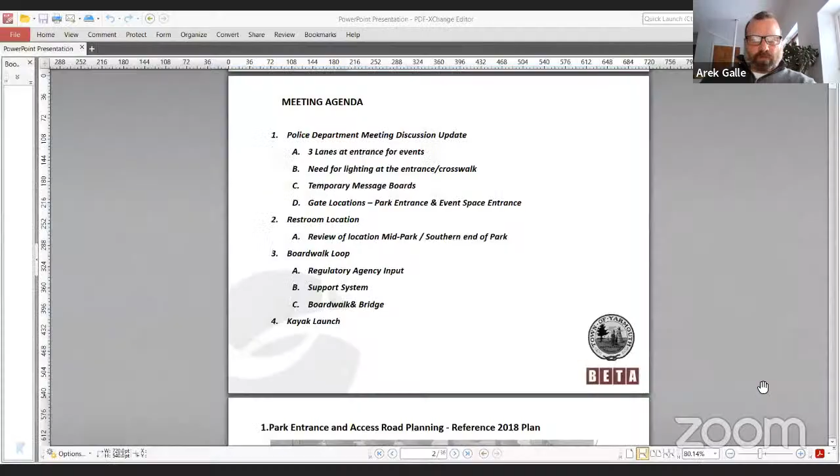Great, so you should be able to see this. Yep. So we had a couple of good meetings in January, and thought we'd recap, talk a little bit about our conversations with the police department. We also had a meeting with DMF and DEP just last week, and that was also a good discussion. So I wanted to talk a little bit about that, touch on some of the thinking about the restroom location, and then maybe close out with some thoughts on the boardwalk and the kayak launch itself.

So, this package really is substantially the same as what we sent out last week. We just added a couple slides today about some of the galvanizing treatments, which we can talk about a little bit later. So just to kind of refresh, this is where we started with the police, and early concepts had sort of this curving loop road coming out, the idea about a turning lane, as you approached route 28, and that's kind of where we're picking up going forward.

We talked with them a little bit about what's worked for them in the past as far as the events. And we said, this is kind of where we're headed right now: a through lane in that's maybe 11 feet wide, a lane out, and then providing some space at the end for that left turn movement. We'll be bringing bicycles and pedestrians in on the left-hand side, the west side, with the goal of having greater walkability for the site than there is today.

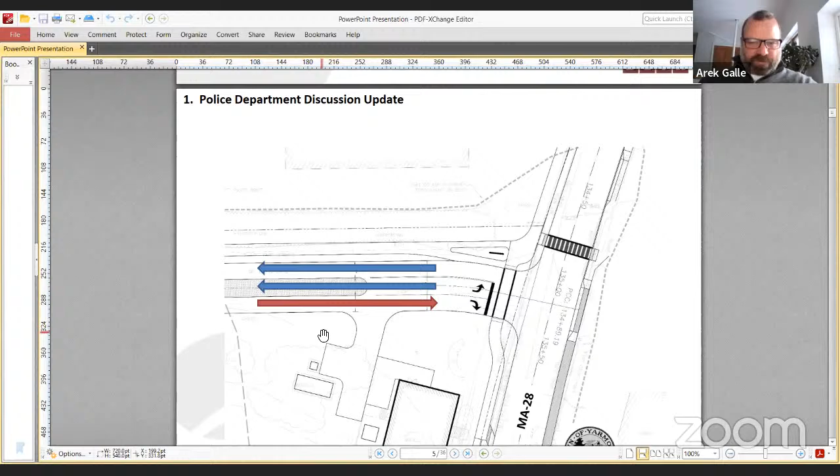They expressed a real interest in wanting to have maybe that center lane go all the way down into the park. They thought the value of that was, in an event, they can run 2 lanes in - you've probably all experienced this - and then run essentially 2 lanes out when the event is over, and still have this ability to get people in if they need to. So that concept kind of led us to a discussion of more than just a couple of spaces to allow for a left turn. We should probably look at making that lane go kind of all the way in.

It's cool, so we can have our own version of the Southeast Expressway right here in Yarmouth. Well, I think that's one of the things Kathy really was pointing out and expressing concern about was not wanting to carry 36 feet of pavement all the way across the entrance. And if there's a way to do it, there's either a textured pavement or a grass pave island that could be driven on when vehicles are coming in or leaving. But under normal conditions, it would look a little greener than it would if it was all asphalt. So that would be - this is pervious, I'm sorry, Arek - that would be pervious material in the middle?

We could do it as a grass pave, which is a synthetic geotextile product like reinforced plastic cups. The loam would be put level and seeded with native seed, so it's got some durability there. Another option would be a modular concrete unit that has space for grass to grow inside the units. A third option would be a textured pavement through the center.

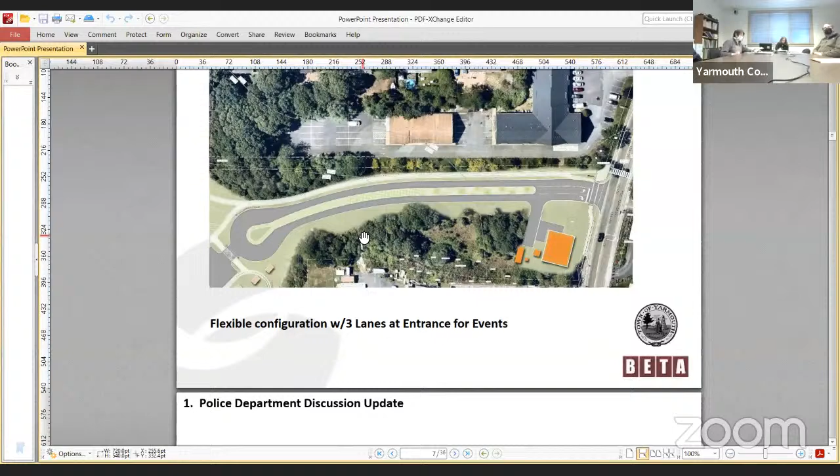It probably wouldn't be curbed just because the police said their ideal would be to have that lane as far back as possible. No, I mean a median between the in and out lanes. So if you ran that all the way through and then narrowed it, maybe it's only 6 feet wide — what you're showing is probably 12 feet wide.

So cut down its width by half, so it's 6 feet with plantings, and push the left and right out lanes slightly further to the east. But you understand the purpose of the center lane is to serve as a lane going in or out during events, so it needs to be the width of being able to be traveled. Are you talking about the width of mountable curbing? No, what I'm saying is right now you're proposing a median strip through there with a left turn pocket.

What would happen if the median strip was reduced so it's only 6 feet wide instead of 12, narrower, and then you pushed the two out lanes to the east? What's the benefit of that? Well, then you get 2 lanes for stacking during events, which is what the police are looking for.

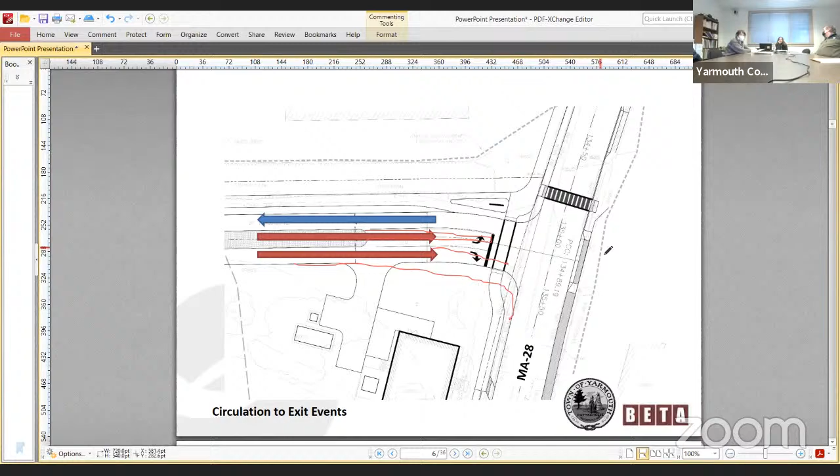For events they're just looking for ways to get people out quickly. Looking at how events were run in the past, when you're leaving you want to get as many people going out as possible. But it looked much more attractive if you had a curved median with plantings and bushes.

Anything we end up doing that is traversable is going to be a weed patch. It's going to be very unattractive over time, won't be maintained well, it's just going to be mowed. In essence, it's going to look like the parking area is pervious. I'm trying to think of an example around here — you know where Bed Bath & Beyond used to be, next to Christmas Tree Shop. It's basically pervious, but it's not the most attractive thing in the world.

Well, I think there are aesthetic considerations. You don't exactly know how that's going to look or be maintained over time, and it is the entryway to the facility, so I think it should have a lot of pop to it and look attractive.

One of the ways to do this too, which we talked about with the police, would be that if the lane shifted to the west and this treatment became the eastern shoulder, it would just be sort of part of the grassed landscape to the east of the drive. Then the median could have more planting. In an event, you'd be having people driving on the grass, but it would be reinforced, with maybe cones along this edge to define it.

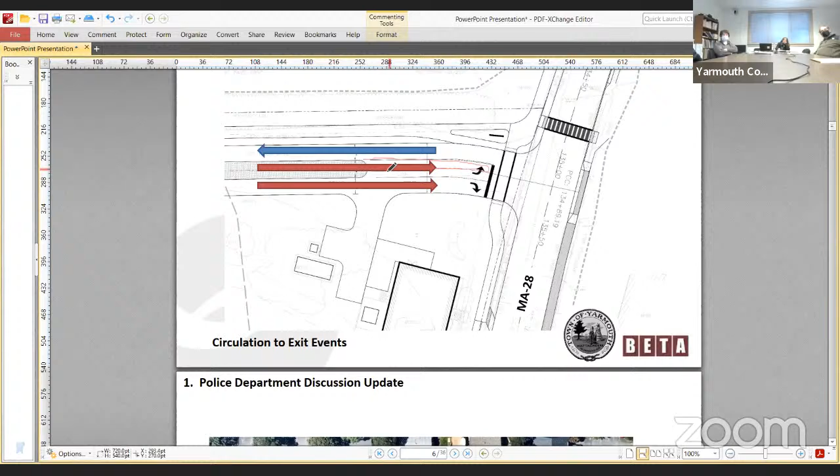You could use turf blocks — what you could do is a permanent pavement to the right of the lift station, and to the left of the lift station use your turf blocks on the east side. So then you'd have the grass texture we're looking for, and the police could utilize it, but you don't have that formalized pavement.

Right, so it'd be paved from 28 to where the lift station is, with some kind of transition. From the left of the lift station, you could have the turf blocks, but the center median would extend all the way to 28 with plantings, signage, or whatever you wanted. It would look more inviting than having 3 lanes right across at the entrance.

It could be something, it's a little skinny, sorry for the drawing, I'm drawing with my mouse tonight, not a pencil, but anyway, you can see it could be a small median there maybe to just do something with the gateway. Oh no, I'm saying extend the full median all the way to 28, to the north.

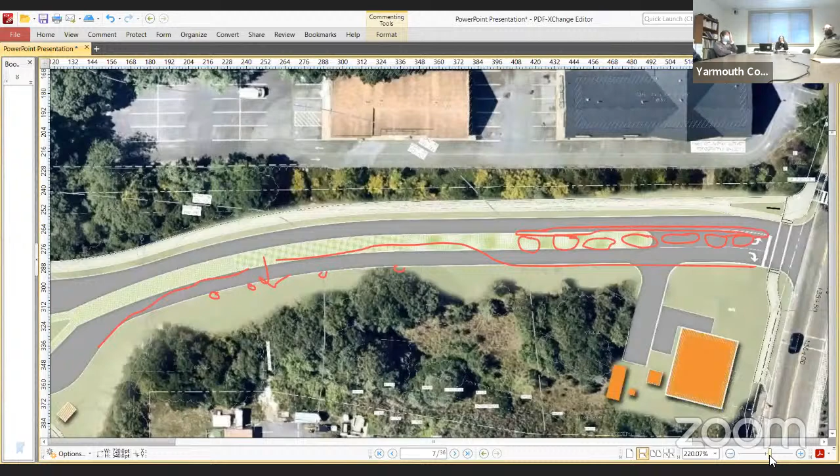That's the median - no, there, he's showing a partial one. It looks like it's lined up with the entrance to the water station. He wants it pulled out all the way to 28.

So Arek, get rid of the left turn pocket, extend the median all the way through to the stop bar. So take the green and move it all the way to the right. But these are cars that are stacked up in a line to turn left. He's suggesting bring that green barrier in the middle all the way out to 28.

Yeah, right to the stop line, the full width, Arek. How wide would you - whatever the width he's proposing is, that would continue 11-foot wide so that people could drive their car on it. Well, no, correct, this is an 11 and this is an 11.

So then what you would do, Arek, is the existing 11-foot lane you're proposing on the east side will go all the way through. Instead of it being a right turn arrow, that becomes a left turn arrow. You'll see in a minute.

And then to the right of that, or east of that, where you currently have the left turn pocket - take the left turn pocket and pull it to the east. And that would be your right turn lane.

Now you would have pavement from 28 to the lift station, and you would transition. Everything to the left of the lift station would be the turf block along the east side, because we're proposing a grass shoulder - it would be a usable grass shoulder though for events.

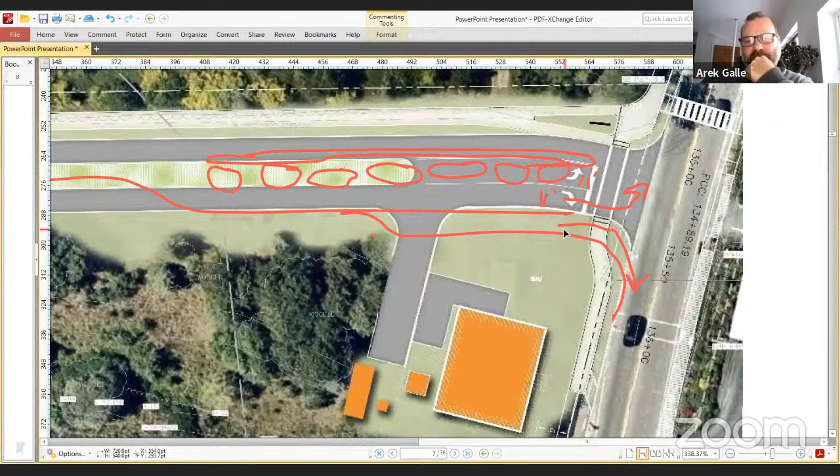So people will be less inclined under normal circumstances to drive on the grass to make that right. Well, that's gonna be paved there - he's saying the right turn lane paved, that would be paved all the way to the lift station or beyond. In other words, Arek, you have to figure out your queue lengths under normal conditions, and that's how far the paving would extend back.

Beyond that point, where all the little dots are, that'd be your turf blocks, so only during high volume events when the police are there. So you have the benefit of having the grass along the shoulders, but we have a really nice decorative median with shrubs and plantings or flowers, which we would not be able to have if we had turf blocks running down the center. So it makes it more inviting.

It's aesthetically much nicer. The only concern is we're already squishing the space that's available for the pump station, and now we're going to be squishing it more by the width of the median. It's only 11 feet - how much space do they need? They don't need that much.

It basically - it's depth, it's a massive vertical pit, so they need to get horizontal, up to a certain height, and critical facilities want to be 3 feet above the base flood elevation. So they need a first floor elevation of like 14.

What'll happen is usually it's on a concrete vertical stem, and then you build the structure horizontal on top of it. It doesn't bleed out horizontally, there's no handicap accessibility to it, so you need to now build the lift station - that's what they had before, was handicap accessibility.

No, for a lift station? A pump station, yes, that's what they had before. I'm surprised because most of the stuff is non-accessible.

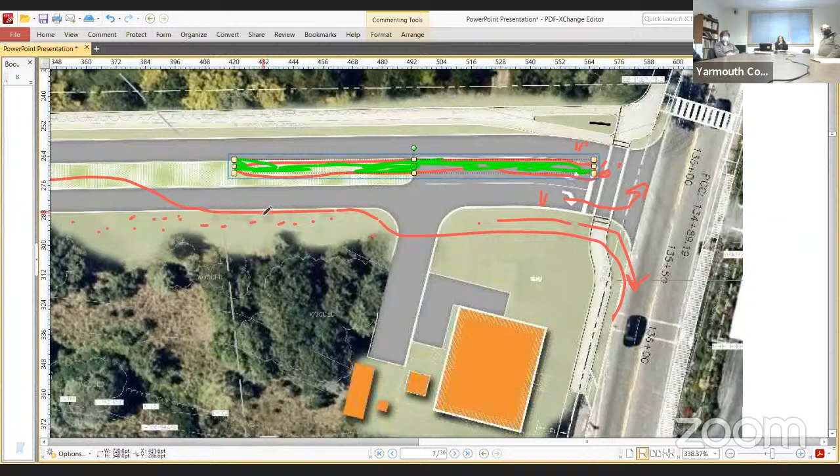Let's double check that. The way we left it is because we are encroaching more and more on the space that was left for the pump station, in addition to the fact that there is a jurisdictional isolated wetland that has a 35-foot offset of no disturbance and a 50-foot no build area. So what we were planning on doing was proposing what we wanted to do and then provide that information to the pump station consultant, CDM, to see if they can fit it in.

So we could try it this way and see whether that would provide them with adequate space, understanding that we may have a problem later down the line with them having enough space and what elevations they need to get up to. So we're looking at 11 feet? Is that what you're thinking? Yeah, that's what we're looking at. We'd be doing a 6-foot median, curbed, planted, which I agree would look nice. And then everything would bump over, so we'd have 22 feet. It's an additional 6 feet more or less that we'd be pushing this way.

Would you move it down? I'm sorry, Jim. Okay, thank you, you are the chair. We gotta figure out a way to get my attention here, so that I can, and same with others, participate.

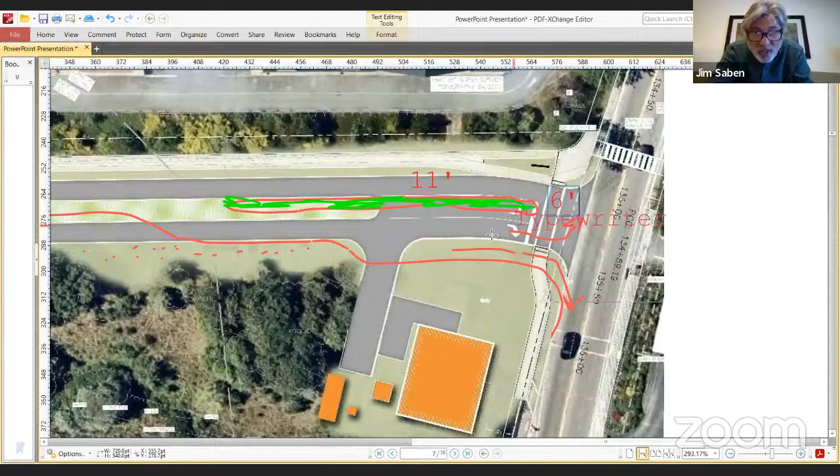I would suggest that we go back to whoever is designing this pump station and say to them that we need to know now what your space requirements are. Because if we design this thing and then they come back and say, oh by the way, we need more space, then we got to go back to the drawing board. So I think it's important that we get a commitment from them sooner rather than later as to what they need. Because my experience with these, Jim, typically you need a parking space for one vehicle for a maintenance technician, just to check things out, plus that longer drive for a boom truck with outriggers.

When you're doing maintenance work, when you're going to pull pumps, there'll be a pad-mounted transformer, and you're going to have a generator too. The biggest thing with this is it's gonna be a big ugly facility. So the biggest thing is, how do you hide this thing? Camouflage it, yeah.

Part of it is great, but tell us what their requirements are for the site, how many, thousands of square feet or hundreds of square feet. We can at least then move forward with our design.

You need to look at the third dimension. I guess this is somewhat of a problem because they need to get up to a certain elevation, they're not going to come off at that location. There's no way, the grades are going to be coming off much further south of our driveway in order to get the grades back up, because they are going to try to elevate it as much as possible. They're not, it's too close to 28, they're not going to be able to mound that enough, from my experience.

What they'll end up doing is a pedestal stem that'll stick out of the ground. The nicest thing to do, I've seen some nice ones, is use brick and other materials so you can make it look colonial.

You make it look like a fake building, with most of the building below having fake windows. It's going to be this vertical stem that comes up above the floodplain. You can do Cape Cod shingles with white trim.

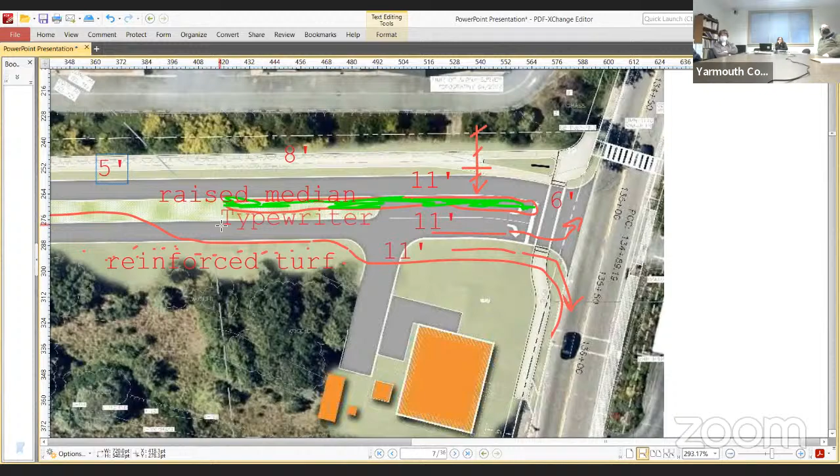I think at some point the police will have to drop the median, and that could be okay, but in this scenario you're going to want to be able to get 2 lanes of traffic able to get into this site.

So there needs to be a gap between the cul-de-sac area and the median, which could be fine, because if you had people coming in, they would essentially need to cross over.

You want 2 lanes coming in? Yeah, they do. They want the ability to have 2 lanes in for the most efficient flow, and ideally the ability to do a U-turn around this island and continue out, assuming this might be closed off for the event.

Jim? Go ahead, David. Arek, can you go back to your first graphics where you had the blue and red arrows coming in and going out? Sure, yeah, this is where we started.

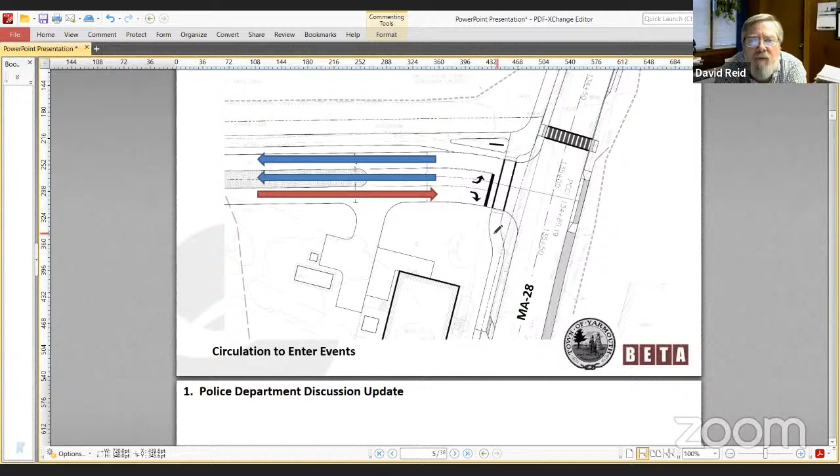Isn't there an advantage to the flexibility of that, to allow us to have 2 lanes coming in as well as 2 lanes going out when we need them? Because I would think when you've got people arriving for an event, it's not quite the floodgate it is when they're leaving, but wouldn't it be advantageous to be able to have 2 lanes coming off 28 queuing up to the entrance to the plaza there?

Rather than just a single one, because you might also have people coming in and going out of the kayaks at the same time, and the boardwalk. Doesn't keeping it kind of open with 3 lanes, with a zipper lane in the middle, give a lot more flexibility than narrowing us down to just 2 lanes exiting and only 1 coming in?

Well, it could be run either way, but I think they need the most flexibility, as you point out, on the exit movement, because- well, that's certainly the way it was when the drive-in was there, at the same time, right. There was only one thing going on when the drive-in was there.

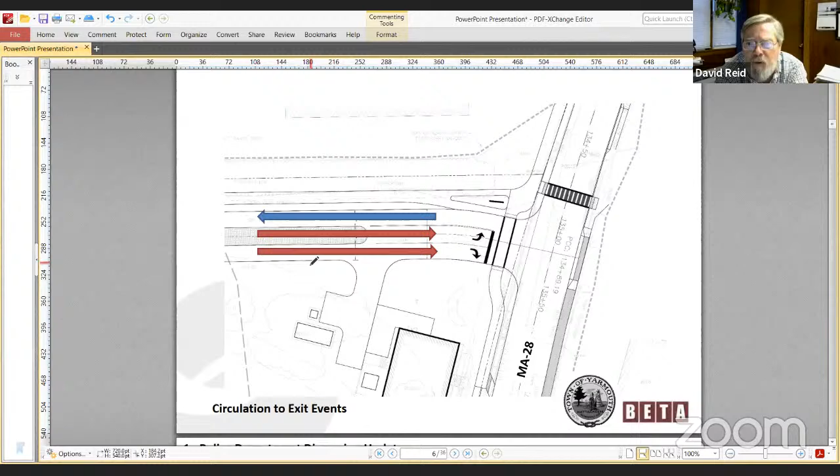When we've got also kayaks and boardwalks and artist shanties and other things, might we want to keep it simple so that we have the flexibility to have 2 lanes coming in if we need them?

Well, you could with Rich's idea. I think it ends up being a little bit of an odd initial movement, because you do want those 2 lanes in. I think it could be managed with the police detail, but you would basically be having...

people coming in this way, and then on that event you'd also be sending people in the second, or they may be coming from this part of the Cape. So the island would be splitting 2-way in, and then they have to reconvene at some point to get into the event parking.

This works fine on an exit, where you'd have folks here, maybe driving on the turf, and folks driving here to turn left. It sort of favors a more intuitive layout for exiting. On the entrance, it's a little atypical, but I think you could do it with a detail.

I don't disagree that an island would be nice, but I think it would really, from a functionality standpoint for an event, be really difficult going in. People would intuitively not want to go on the wrong side of that island. Even if you have people waving you on, intuitively they're going to feel like it's the wrong movement.

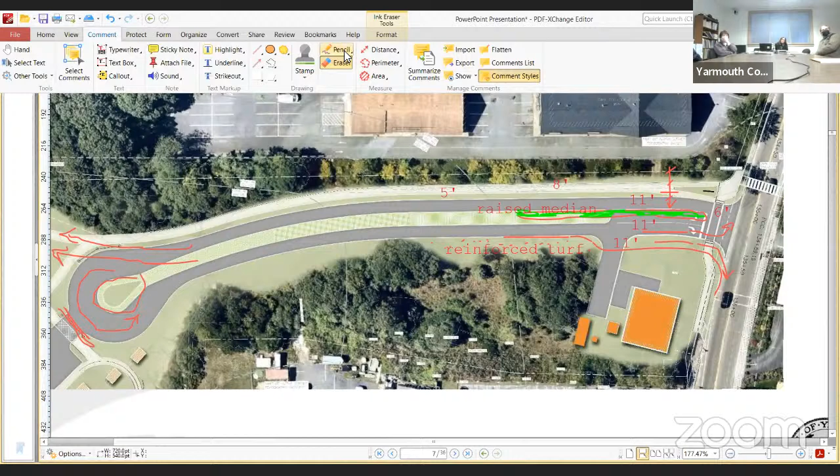Yeah, that's the tricky thing, you'd have to catch them. Let's just say people from the east are going to be sent in this way, with the island splitting them, and people from the west would be coming in on this side.

And here's the question too, Eric, are we gonna need a left turn pocket off 28? No.

What do you think about a regular use? Well, before you say no, remember it has to come into us for a permit. Our traffic engineers have been looking at it, and some of the guys in the transportation group were on the call with the police. Again, the feeling was that with the entering movement happening over a longer period of time, it was a little self-managed, staggered.

The presence of the crosswalks, and sort of courtesy gaps, you know, people acknowledge that folks are trying to turn left. There'd be message boards out here, there'd be people crossing the crosswalks. The courtesy gap allows some ability for those lefts to turn and make that happen.

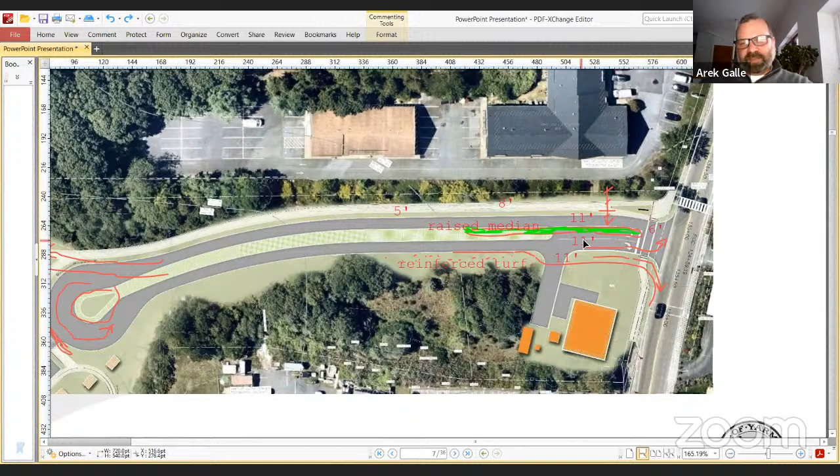On the exit is where they were a little more concerned with trying to be able to get everyone moving out.

So in order to move this along, I'm going to simply say something I say all the time: people are dumb. Keep it simple. If we get too complicated, we'll have somebody driving into the pump house station thinking that's 28. So however we design this, keep it simple, and I yield to the expertise of our traffic people.

One other thing, Eric, just noticing here, the 5-foot grass strip next to the SUP, you need to extend that all the way to Route 28. Yeah, the goal was to get a little island in here where we could put the sign, but you're right, that would have to continue right out there. You could shift it a little bit further to the west.

What I started to say is we're kind of up against a minimum vegetated buffer requirement here of 10 feet, and then the shared use path, and then the 5 feet. So there's some pretty linear math that we can relay to Jim's point, and relay that to the folks working on this station, that we are absolutely up against this edge.

Coupled with the grading and the barrier, this is an absolute minimum on the shared use path as well.

So, this is an interesting idea. I think it adds a lot to the aesthetic. I think it's just functionally, can you see it working on the in movement with folks coming in on this side of the island, and on the other side of the island as well.

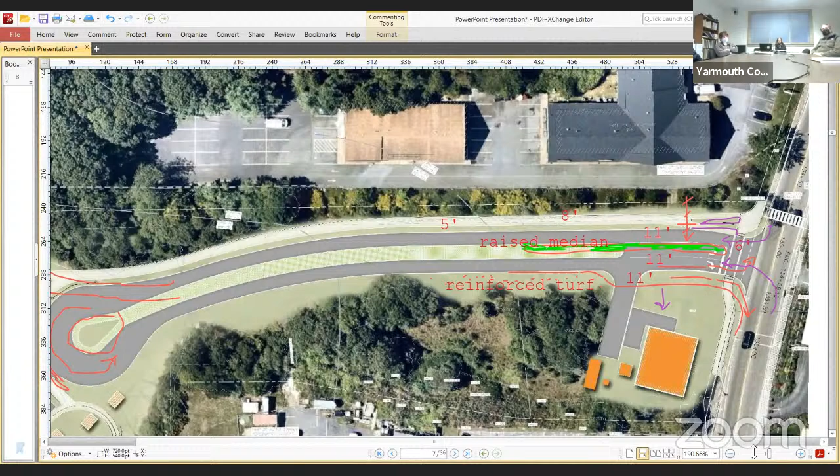I think no one wants to see a really wide throat of pavement at this site. I'd say 6 feet is like a minimum width you should consider, because it allows you to place signage so it won't get hit by vehicles and trucks. It's also big enough that you won't end up with a death strip that just dies out, wide enough that something will be able to grow in it. Obviously wider is better, but from our experience that'd be the minimum.

Okay, so as a group, where's our thinking on this? You want us to flesh out this raised median all the way through, run the math and see what this geometry looks like? Like I said, we'd have to end it. We'd have to have some kind of opening down at the southern end, where that median would stop to allow folks to cross over and enter the event.

Find out the requirements for the station. They're not far enough along, I think, in the design. I think it almost needs to go the other way, where we say, this is the space that we're taking—can you fit your station in there? Because we did try to do it the other way around, and Eric was going to take a quick look at it, but it just started getting so complicated. It's really not in his scope to be doing that.

Well, I'd say they haven't designed it yet. You need to fit your station here—this is what you have to use. But I think if we say we've done the bare minimum, versus, oh, now we've added another 6 or 7 feet, then they may find out that doesn't necessarily work for them. I honestly don't know, but we can certainly ask the ADA question, the handicap accessibility question.

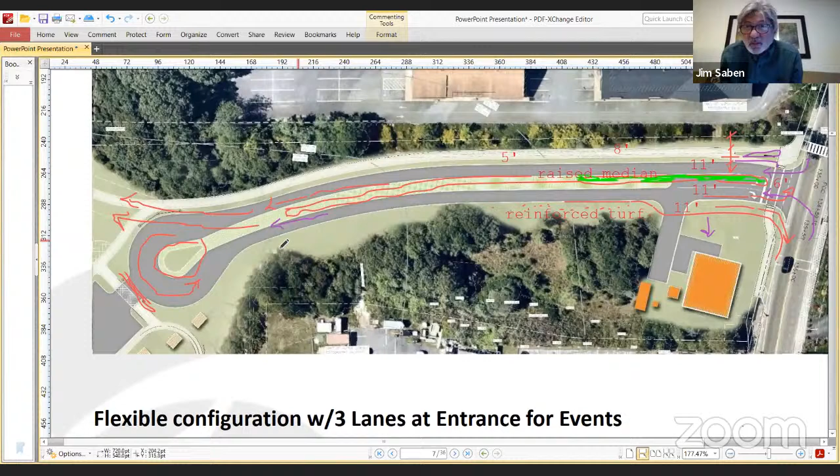I don't want to make it overly complicated—I agree with your idea. The only other thing that occurs to me, as you're sketching there, is at the far left end, instead of a sort of cul-de-sac, what if you made that more of like a rotary, so that you could shift the lanes back and forth?

Yeah, you're right, this would have to be open with this kind of concept. So then what you're saying is a lot like the entrance to Seagull Beach? Yeah, where you've got that rotary type thing, or a roundabout.

Whatever the engineers design along there looks good to me. I like the idea of having some vegetation there, but I see that it complicates the intersection to have too much vegetation in the middle. I kind of like to keep it simple, the KISS principle, right? But you guys are the engineers, so.

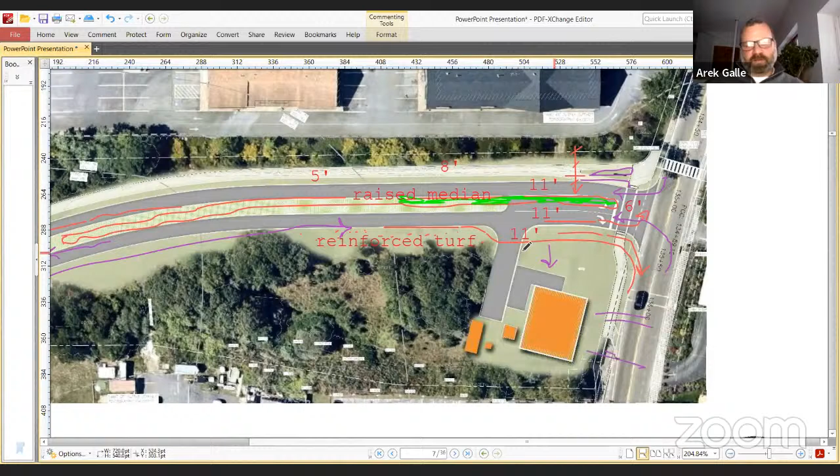Well, we are ahead of the pump station, and there may be some geometric requirements we don't know about, as far as where the pipes are that this is tying into—maybe it has to be in a certain spot. So we could show this as most desired, if the bifurcation of the in-lanes is okay with the planted median, and show that with that group. Kathy, I don't know whether it's a meeting or we just send it along and coordinate with them that way.

CDM? Yeah, and show them where we are. I mean, we know we need at least 33 feet right across there, and we'd like to see—I'm hearing a median is what folks are interested in. We can send it along and see if they want to have a meeting, but they're going to need to have all the background information with the isolated wetland and kind of like to what we're looking at.

I'm liking Kathy's idea of, let's just move forward and tell them this is what we're taking, you figure out what you've got to do. Just understand there might be some give and take, because we do need a pump station here. This is true, we do need a pump station.

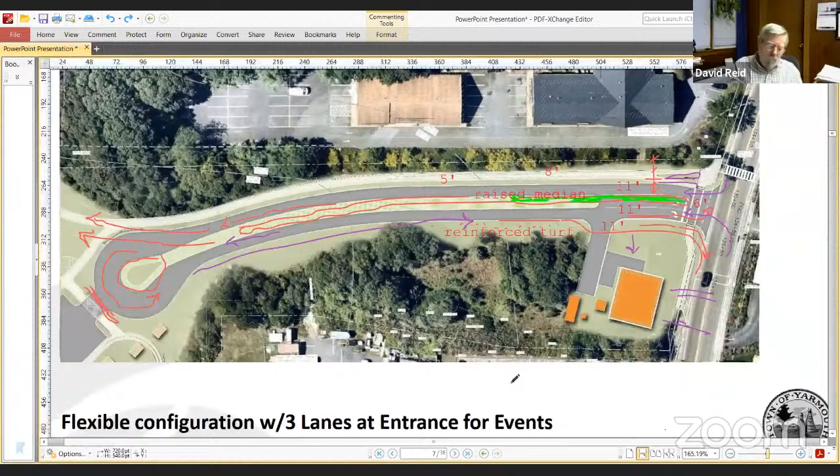Okay, Bud, do you have any questions or comments? No, I like the idea of a flexible lane, one in, one out, one that changes based on the event. So like that right there? Yep, like the expressway. Okay, Susan?

Susan, you have anything else to add? Actually, I'm in the Rich camp on this. I think we should pay a little more attention to the aesthetics. It's the gateway to what we're spending a lot of time on. If we can make it better looking and still retain some functionality, I think we ought to at least explore it. I think it's worth it.

Right now, it's relatively unattractive. It could be a lot more attractive and retain its functionality. So I think we ought to explore a redesign, a slight redesign.

So if you don't make the entrance inviting, we're gonna have a sewer lift station next to it, and then you got the plaza over there. What makes you want to go into it? I guess if we had to stick with the bare option, maybe you'd look at cobblestones or something for that center strip. But if we have an option to make it look better and retain the functionality, I think we should at least explore it, see how.

I don't know how cobblestones play out with regard to impervious surfaces, because I think all of this was going to be either pervious grass, or pavers. It was more going to look like grass because it's woven underneath the ground and you really don't see it, versus cobblestones. I don't know, Kelly, whether that would be considered—we'd have to do something with stormwater for that.

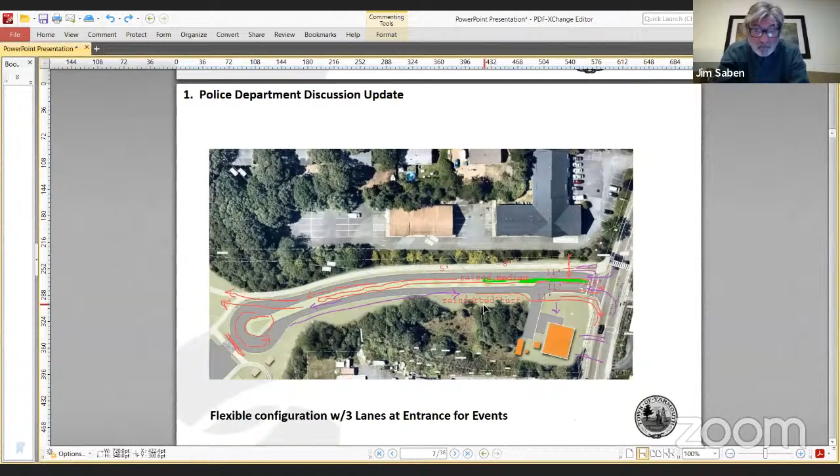Sure. So this was the conversation with the police and some of the other things they were saying, and we're already considering this, but this is related to the pump station. We said there's really not a lot of lighting there, it's quite dark at night. The existing lights are sort of utility lights on the poles. You can see on the south side of 28 there's no lighting there presently. So their feeling was they'd want lighting around the pump station and on the entrance drive as well coming in.

They also wanted the ability to put in a temporary message board, much like they'd done before. They wanted sort of a graded off area here. Again, to Kathy's point, these are the kind of things that impact a little bit the footprint of the pump station—having enough room to put in a message board that can be seen. I actually think it maybe would be up even a little further so it can be viewed in both directions. And all that suggested to us is that maybe the park entrance side needs to try to fit in here on the west side, in the form of some small island or something there in the shared use path.

Can I ask a question? The message board is temporary, correct, Arek? Correct. They'd bring it in for an event. This is just a typical one, though I think you have nicer ones. You don't have to worry about storing it since it's not ours. I believe it's the town's. I think what they really wanted is to know it wasn't sloped or tricky to get a truck up in there, and they wanted ease of deployment to get it in place quickly and then take it down and off site.

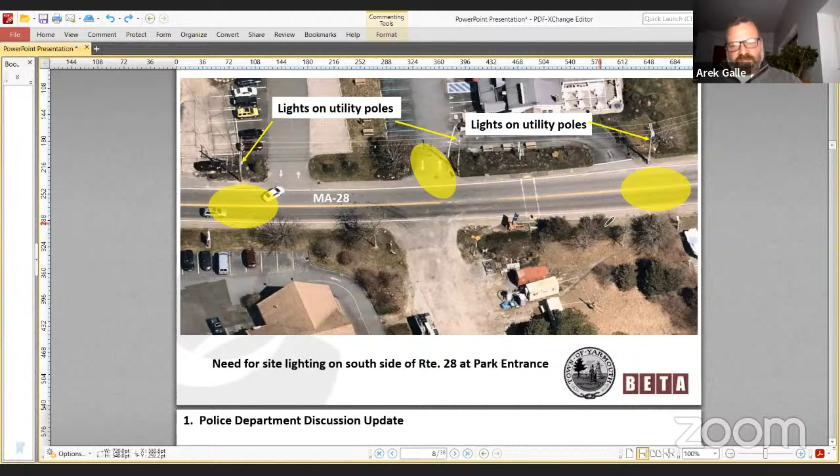Yeah, ideally it's all seamless and this whole thing has the same lighting and the same kind of landscape treatment to bring people in. I'd not celebrate this building as much as try to make it blend in with other large scale buildings and marine environments, and have the emphasis be from this edge in, with this as a backdrop to the lighting and the landscaping.

Okay, so we talked a little bit about the restroom location with the police as well. We're debating two locations - there are merits to this mid-park location and merit to the south. We asked them if they had a preference. They really felt that once it's off of 28, they have to drive in anyway to look at it, so they didn't have a strong view one way or another. They did say if it was in this position, they wanted to be able to fit 2 lanes of traffic in, so between the corner where the property bends and wherever this facility is, their ideal was 2 lanes into the parking and event space through there.

And you can see this, we put in the parking layout that's about 275 cars, I think, is what's showing there right now.

Here, how are you going to address this - the one thing I do see is conflicts between the bike and ped path and the parking facility, especially if you have people walking in.

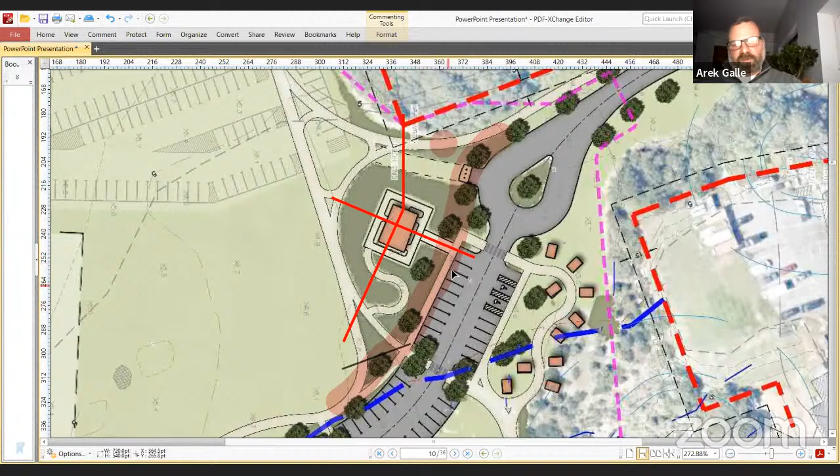Yeah, so one of the things we've been working on this week - I think I actually have a slide at the end I can show you - is trying to bring this through here and get the bikes to come in between the restroom and keep them closer to the road. In an event you would close off and not let bikes pass through there. So to your point, we're working on this, and the impact of that is it sort of pushes the restroom back a little bit in order to fit everything and get the bikes through here. But I think we have a scenario that works.

Yeah, it looks good, because that helps remove the conflict point, or reduce it, like in this one location.

Yeah, let me go a little bit out of sequence, but I believe we have this. You can see it here at the back. Yeah, no, I see what you're showing there. This is really in development, but I wanted to have it available today so you can see it coming out of the front here. So the impact is everything just kind of moves west, but we still get the 2 lanes - the ability to run two sets of vehicles into the site, keep the restroom here, line it up with the artist shanties, and still have the bikes come through across the front. Yeah, we think we can make that work well, actually.

So just jump you back to where we were. While we're here, if I can, have a discussion about the location.

One of the things I shared with Kathy is why I still think this is the preferred location: if we think of this beyond just a bathroom facility, but think about it as a bathroom and a spot for coordination of the space, be it for storage of tickets or for the cones that have to go on the street or whatever else, this bathroom can become more of a multi-purpose venue besides just bathrooms.

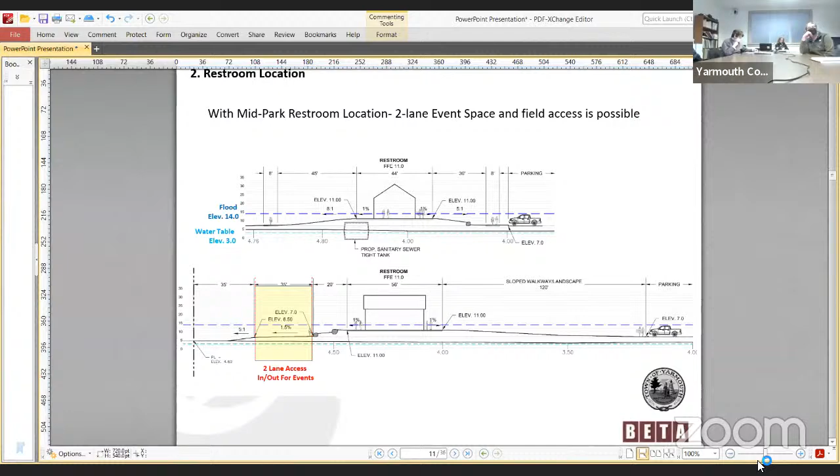Just kind of jumping off from what the police opinion was on it. These are some cross sections through that facility in that location. You can see, to your point, you are elevated, you probably would have some views of the river as you go up and down the ramps or the stairs to it. It sort of works well to get the sanitary sewer tight tank in here. This is kind of the window for vehicles to come in and out, maybe some boulder outcroppings. So it is working in this location.

And that's kind of where we jumped off. I think the considerations are the middle versus the south. It's about 500 feet. We'll have to fill in both cases to raise the grade. So it's kind of a wash, it's sort of a similar activity.

I think there is an economy or an efficiency for the electric service to kind of centralize it and have it here. So I think, Jim, to kind of your point, it does organize some of the infrastructure. It does organize some of the planning in the park.

Water, we're already bringing water down to the kayaks, so that's maybe not much of a difference for the water service because it's still being extended down. The sanitary sewer, there's definitely some costs there that you would be avoiding by going with the middle. The pump might need to be a little bit larger if you went with the southern location. The force main length is longer and you would need more manholes or inspection ports. So those are costs that you wouldn't have if you were in the mid location.

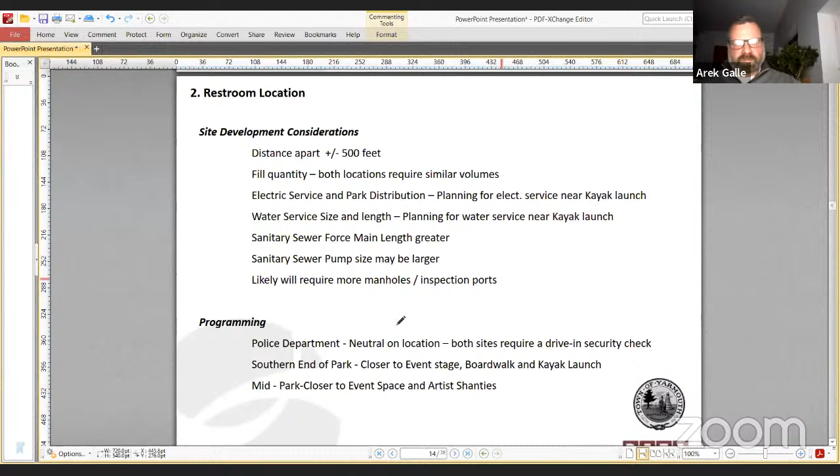And kind of looking at those numbers, it looked like more than $30,000 of difference between the two. So that may sort of shade you towards the middle location if you're predisposed to it. And I'm telling you, it can work there. That may help you make that final decision.

I'm sorry, I didn't quite hear that. Are you saying that the location you show there, closer to the entrance, would save about $30,000? Yeah, we'd have less, it would be less expensive, basically because you wouldn't be running a sewer line and the manhole structures and so on.

That you would be running from the southern location. And it might be more than that, prices are really volatile right now. But in that range of $30,000 to $50,000 on not doing the sewer over that distance. Is that your recommendation? You think that's the better location from a design perspective?

I think that when you take holistically, you look at the budget and everything else involved, I think it is a good decision to stay with it here. If you recall, it was here before, it just was on the eastern side. I think environmentally, it lets you do more restoration down here. It gets the structure away from the riverfront area. It saves some utility costs.

And it acts as kind of an organizing central element. It's kind of a counterpoint to the stage. I think there's just a lot of functionality that goes along with it here, that I think holds up and makes sense in this location.

Arek, may I suggest, there are utility cost savings. Something you should consider is leveraging the pump station, since they'll need a pad transformer for it. Instead of buying multiple facilities, we could tie into what they'll need and save substantial costs. From venues I've seen in Florida, usually you'd do a freestanding stainless steel utility cabinet for electrical controls. But because of the floodplain here, you might want an electrical room accessible from outside on the bathroom facility that houses all your control equipment, so it's above the flood elevation or in the area with the stop logs, avoiding flood damage to electrical controls instead of cabinet-mounted systems that would get damaged.

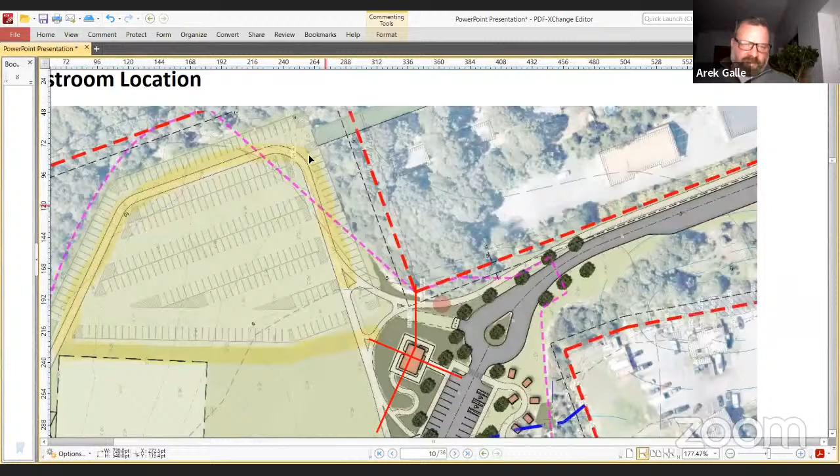Well, the ideal would be that you could ride a bicycle on it - attractive to families with younger children who might like a place to ride that's not as busy as the rail trail. I think police and fire both expressed a need for a defined way around this edge and back between the stage and the parking. That path gives that definition, or at least that's the intent - that the pathway would help organize the parking. They also wanted to be able to circulate behind the stage, coming around the back.

I apologize if I missed that part of the discussion at one of these meetings. It's perfectly okay, I just want to understand. So basically you're saying in that open gray area, that's bring-your-own-chair, and performers will use traditional speakers.

A line array system, I think, which is different than some of the speakers that have been at concerts in the past. We're also going to be limiting the number of events that we have, including concerts.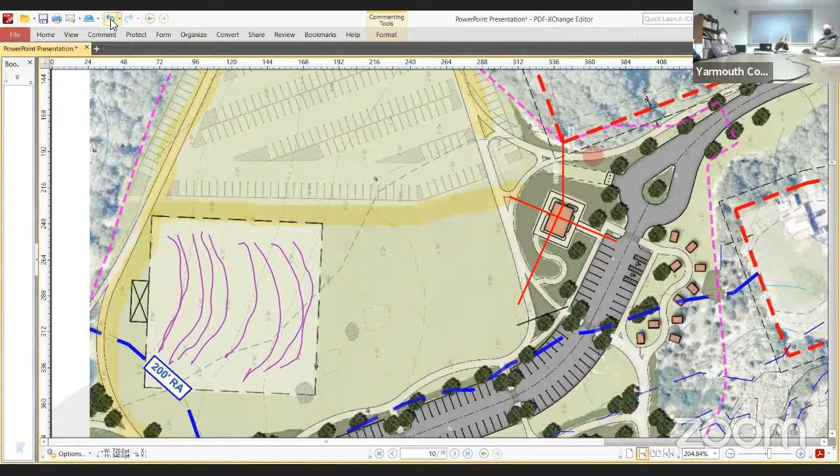A good way to think about the path that goes around is the paved bike path sidewalk around Townhouse Park, where you get the playing fields. Instead of playing fields, we have the parking, but the parking's still gonna be grass. The intent is it would have some kind of turf block together, like circular PVC pipes cut and hooked together to the mat. So it'd be basically a grass area when it's not being used for parking, but has the ability to support vehicles.

Did the police or fire say anything about lighting in that section? Are we gonna have to put lighting in there? That's a good question. I don't recall them talking about lighting in the temporary parking during an event. We didn't specifically, but in other events they have had some type of temporary lighting. I do think we need to look at maybe putting some type of lighting along the perimeter, but also being respectful of the fact that we don't want a lot of light pollution to the neighbors.

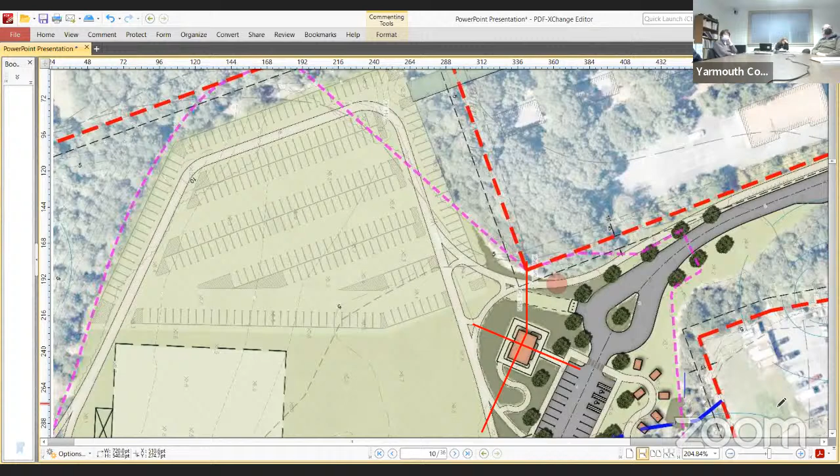If you look at the back top corner where it's a 90, where you have an area that's hatched out, right up there in that corner, and there's another one where there's a 45-degree bend to the left of that - what you could do is think of more like Townhouse Park, where you have a light tower, where everything's projecting away from the residences. It'd be a lot better.

I don't like temporary lighting, because in my experience it's never set up correctly, it's spilling all over the place. At least this way it could be done by a lighting designer. And then you don't have generators running all the time with temp lighting, because with those crank-up lighting units, this way it would be wired into the system. We intend to do that. That's part of it when they get to some of the more details.

That green line near his pencil, that's the road we're gonna use as emergency access, top right there? Right, we did talk a little bit about this, and the feeling was that this could be narrowed down. It did not want to be the width of Cortland, it wanted to be more like 12 or 14 feet wide. Because it's just an access point for emergency vehicles, this graphic is wrong, it needs to be narrowed down a little bit. But that's where that would be. Okay, cool. Anybody else on that slide? Questions, comments? I see none.

Questions, comments? I see none.

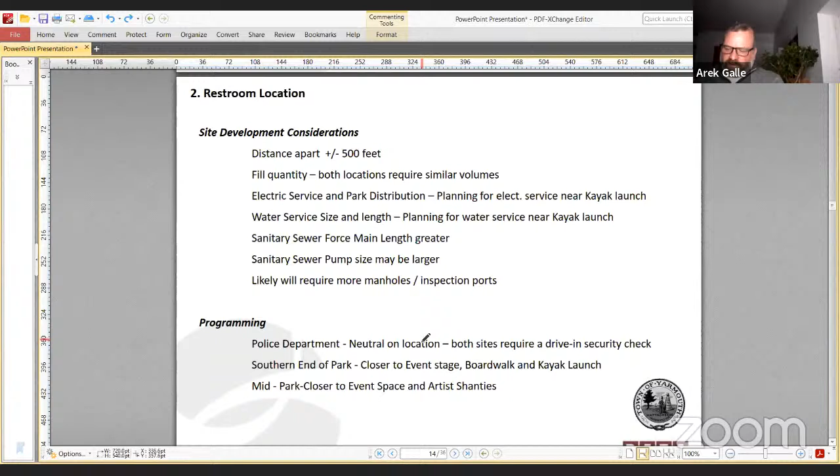Keep going, Arek. So we just closed out, and I don't know if you're done with your discussions on the restroom location. I think there's evidence that the mid park location works well in some regards - it organizes things, it's a central point, and it probably saves some costs over the southern location. I do think it would be great if the committee could make a decision on the location of the restroom this evening, so the designer can start moving forward. That'd be helpful. Yeah, we'd like to go forward in a more concrete direction, so we could get into some of the utility questions like lighting and sewer and water design, but we really need to land the building first to be able to do that.

All right, so let me go around the room here. David, do you have any comments with regards to - I think we're trying to decide whether we want to put the restrooms up front or stick with the back idea. I'm okay with it up front. As we talked about last time, there's some good reasons to put it in the other location, including to accommodate the people who we hope will be using the boardwalk. It makes quite a distance to go around that loop and then walk all the way back there. But if for other reasons this is a better location, I'm okay with it.

Okay, Bud? Yeah, I like the mid location as well. Susan, fine with it - the mid location as presented, not the front location. Yeah. Rich? Not opposed. Okay, so there's a little help for you, Eric. We've given you some guidance that we think the mid location is probably the preferential one.

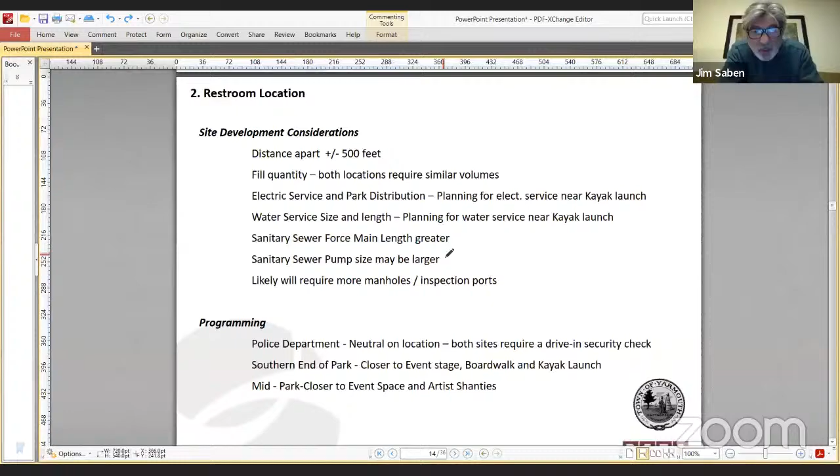And again, I still think we have the opportunity to use that as more than just a bathroom facility. So I think it's probably the best thing to do.

Agreed. I think maybe the next thing is starting to look at what type of size and layout that might have, Eric, as well. You want to make sure you have enough size for some of the things we've been talking about, because the grades are so critical there for getting up to it with handicap accessibility.

Yes, with this information we'll be able to marry that with the access requirements for parking, and then match it up with the utilities and see what you end up with for a footprint.

So Eric, are we fairly confident we can build it as a mounted structure and get it permitted before the end of the year? Yes. Okay, great. That's why we need to start making moves. Okay, that's the answer to that.

I should not have answered for Eric, but that was our understanding from different conversations we've had with the building commissioner and DCR with regard to the change in the building code. The change might come as early as January 2023, where they're going to start looking at coastal A zones. I hope the Conservation Commission doesn't do anything with regard to coastal A zones before that.

They are planning on it for the spring town meeting. So what are they planning on doing? I don't have those specifics at the moment, but I can give them to you. I have a draft, I just can't remember it.

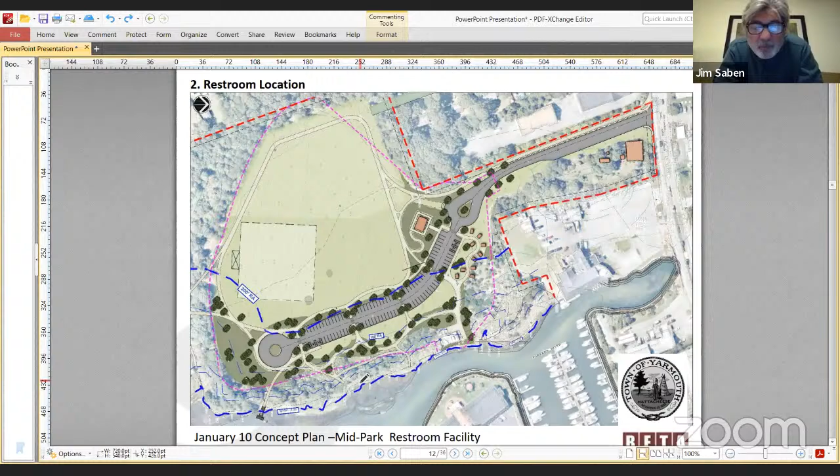Well, I think a lot of times what they do in regulations, and they certainly did it with the stormwater regulations, is if you're at a certain point in design, certain things are exempt from the new regulations if you've kind of gone to a certain point. So that might be a case of something here.

But the state is looking at coastal A zones themselves in the building code, which has obviously much more teeth than a lot of other things. So they want to have that in before the state does.

Yeah, I mean, we've been waiting for the state for a really long time. Okay, fair enough, fair enough.

So maybe Kelly and I can stay coordinated with that, and maybe the DISAC could write a letter or something commenting on those wetland regulations, saying we're kind of partway down through this. I'm assuming that this spot still is in the coastal A zone. I know the old spot was, but we can certainly take a look at that.

Yeah, good question. Go ahead, Eric. Yeah, one thing I would say is if for some reason the assumptions about how this is built in this location changes—

You can see the sanitary sewer tight tank, there's advantages here. This part of the site is very low, so filling here for the restroom sort of works, but there's going to be buoyancy issues and design considerations with that tank. Yeah, I agree.

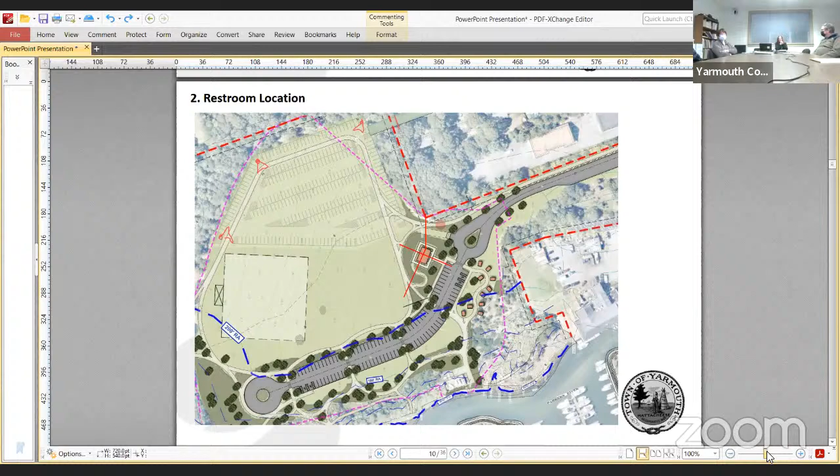All right, go ahead, Eric. Okay, so we can move on maybe to the boardwalk. We can just touch on that a little bit in our conversation. Kelly was part of that meeting as well last week, and it was sort of to introduce the folks at DMF and DEP to the project.

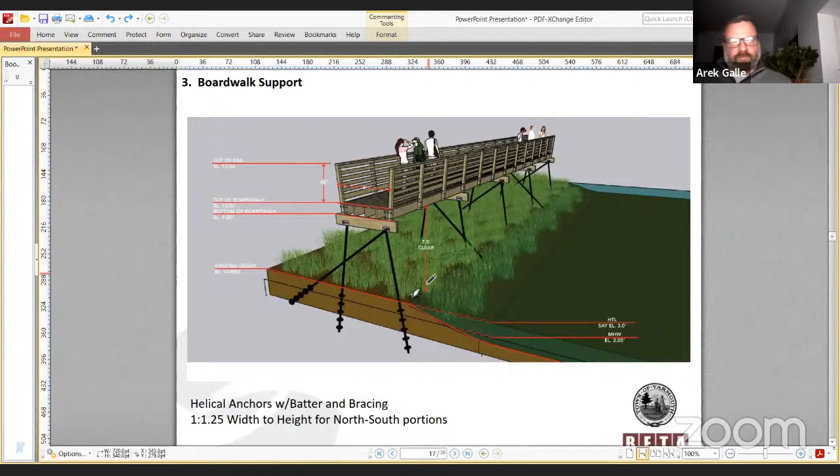We shared with them these images talking about the clearance below on the north-south, and then the clearance above, below again on the east-west side. I don't know why that says north-south, but this would be east-west on the higher clearance.

And then we also shared these images with them, just kind of talking about whether it's a micropile that's used to support that structure, and it might look something like that. Or whether it was a hybrid that used a timber post and had some kind of union at the ground. This union needs to be strong enough to encapsulate and protect the wood and reinforce its connection to the helical anchor. This is an example - these are not encapsulated currently, but this would have some kind of encapsulation detail here, which would have a little bit more of a bigger footprint on the marsh itself.

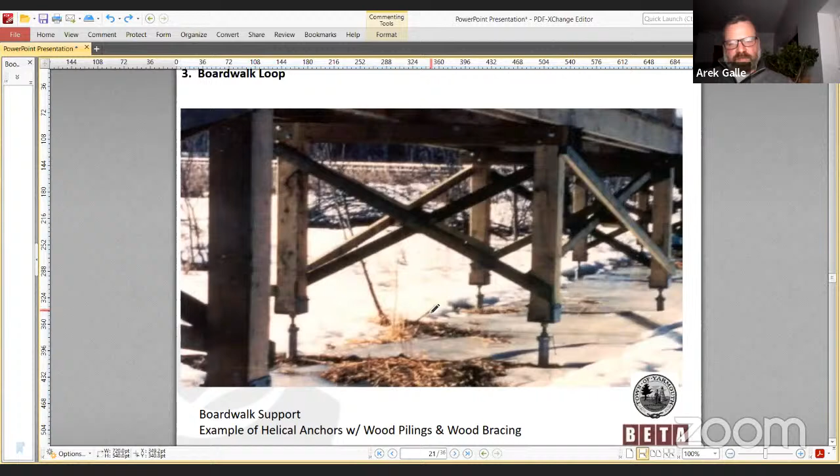One of the concerns, I guess, we just wanted to hear from them what they thought about this approach and strategy. They said it was really essential that we maintain the 1-to-1, and in DMF's instance, I guess the 1.5-to-1 was sort of their goal, but they understood if projects weren't always able to make that, and they were really interested in how minimal the impact in the marsh could be.

Is that fair, Kathy, to maybe let you or Kelly add to some of those comments? The only thing they really emphasized, that what I got out of it was, taking a look at the temporary construction impacts as well as the permanent construction impacts, and that maybe going with something like the helicals at a lower height, knowing that you can't go too high with the helicals, might be more amenable for some than having something that has more permanent impacts or more construction impacts like pilings or something along those lines.

I don't know if Kelly had something. Yeah, I think that was kind of the takeaway for me as well, and really emphasizing that their 1.5-to-1 was focused on the spartina grasses rather than the slightly more upland vegetation, so really focusing on trying to keep it in there.

I can't hear the conversation. Is it? Is the mic - it's right there, yeah.

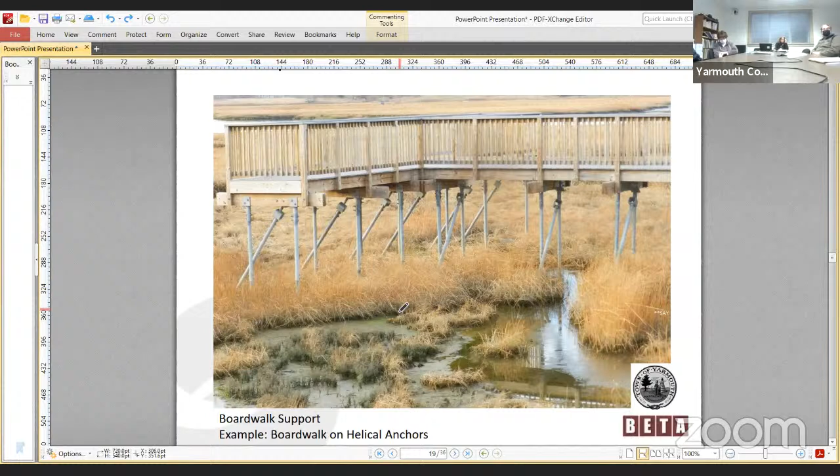So that's actually beneficial then from when we were out there pulling things more into the brush - that would make DEP happier. Yeah, they just want to avoid going over the marsh grasses. Right, and I actually prefer that was pulled in more either because then it wouldn't be as exposed.

Right, we asked them - I think Kelly might have asked them, or I asked them point blank - if you had a preference, which orientation would you prefer, or which alignment? And they said they'd prefer us to stay away from the Spartina and stick to the high tide bush, that deciduous shrub that we spend a lot of time walking around in. Not the grass, yeah.

Right, and Eric, because I like that, because if you go a little further up on the sheet, that would pull that further in and shield it. That would allow that to hinge down.

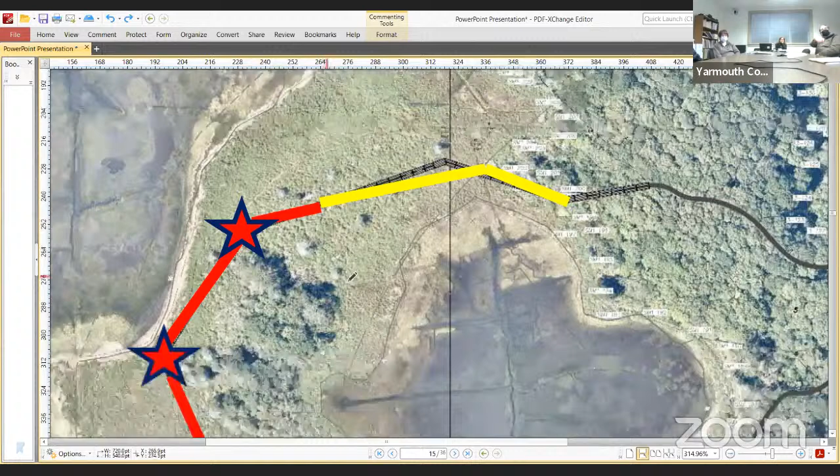Yeah, we're still kind of working out how this comes through here. We've moved away from this western connection and we're now connecting on this interior piece. I'm still not a big fan of that first look out there. I love it, and I think once we get

input from the neighborhood, it might not be so favorable either, because this is still happening in the back. You can't really invite the neighborhood. There was a lot of input from the neighborhood on the East Bank previously, not the other side. They're not aware of this.

And we've gone out of our way to accommodate. Well, it also reinforces the importance we talked about last time about the building materials and how it's gonna look, so that if there are concerns, we're gonna try to have something that blends and not overpowers. I agree, and that's why I think it's key - it sounds like I'm very happy here.

DEP is favorable to it going into the bush as opposed to staying grass, so that'll help hide it.

If you use the vertical ones - if you get another picture, Eric, that showed them battered with the cross bracing, that would help. The images you have don't - none of those show it, those are all plumb. You actually have the helical piles battered. I've seen other designs that can make the structure lighter, I don't have an image with me, but basically the pier cap is set into the stringers.

So it makes a much lighter structure. So that pier cap would be up high. Either the stringers would be set down flush with the bottom of it, or the pier cap would be brought up. You'd still get your clearance, but it makes a lighter structure.

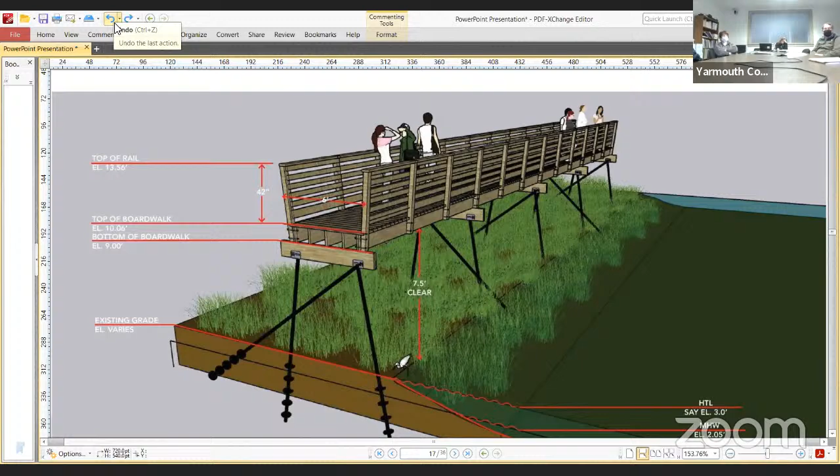And like David was saying, if we use the cable, we can make it a lot lighter structure, so it doesn't stand out as much. DMF expressed a preference for the cable as well - they thought they'd get some extra light, which is true. We talked about the cable, then also maybe doing vertical as well, which would offer - I like that too.

We were trying to represent that we're still going through a process and these things are being looked at in greater detail. But we did talk about both the picket and the cable, in addition to the horizontal. I want to remind everybody that part of this is going to be dictated by supply chain and the availability of the materials we want to use, so that may be a dictation versus our preference in some cases.

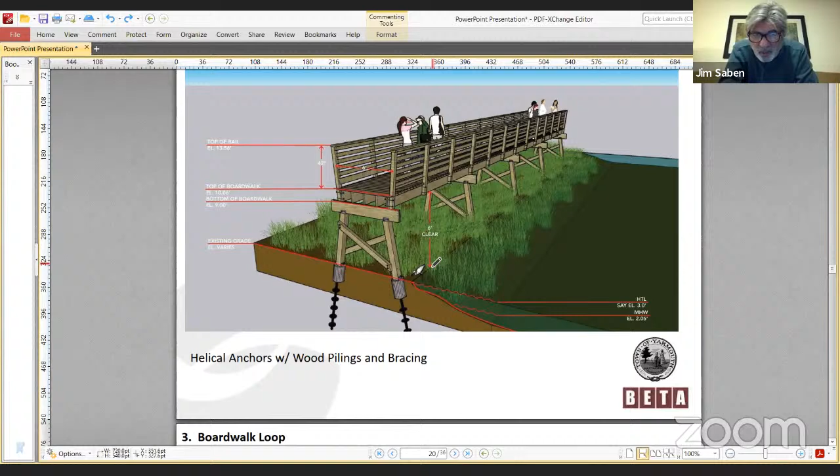And you've expressed that to conservation and to others, that we're looking for some flexibility with materials, I'm assuming - is that correct, Eric? We are, and I can continue on that thread, but all along we've been saying we need to be flexible in terms of just budget and overall project approach.

Keeping in mind, we've got a couple of different systems - we actually have a little bridge over the tidal inlet, we have this boardwalk system, we have the kayak launch. It'd be most efficient to try to make the structural systems very similar, if not the same, for all those, just to simplify the construction process, and try to pick the one with the best economics around it and the least environmental impacts and best constructability, given the conditions.

They did ask us a little bit about when the work would be performed, and getting our heads around time of year restrictions maybe. Certainly ideally you're not out in the salt marsh during the growing season. However, with any of these systems there are frost concerns in terms of when these things can be installed, and frost action on the anchors. So there are just layers of things we're working through in terms of making recommendations on the framing system.

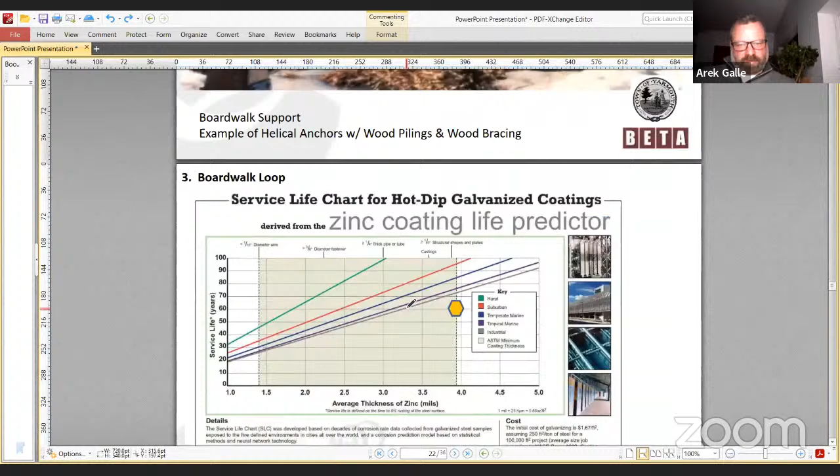The structural supports - Jim, I know you'd asked me some questions about hot dip galvanizing and just the life of the helical anchors. We've been working with a couple folks on that.

The approach we're going to recommend with the helical anchor is a thickened wall, so there's more metal on these tubes that support, a heavier or thicker wall. They're going to have almost a 4 mil galvanizing coating. This chart shows the forecasting of the life expectancy. We're kind of factoring these down a little bit, and we might be looking at a 60-year life with close to 4 mils, the thickened wall, and something in terms of its lifespan.

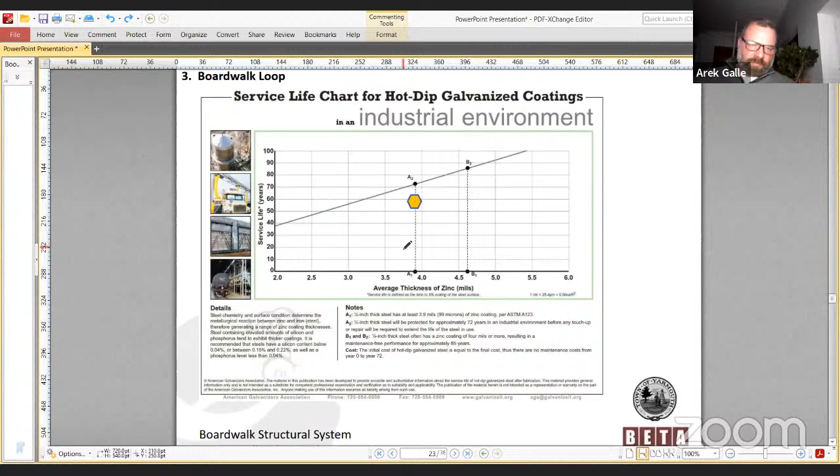One thing we didn't talk about, but we've had in sidebar conversations, are alternative systems to the micropiles, which would be a composite pile, something like this. We did not talk with the agencies about these yet, we're still kind of fleshing out some of these composites. This would be an FRP, or fiber reinforced plastic, composite piling. It would be very strong. The challenge is it's more conventional, it's got a bigger footprint, and it's a driven pile, not a helical anchor.

Advantages might be that you'd be able to increase the span slightly between them, so you might have fewer of these in the marsh than with other systems. Here's an example of what that looks like. This one was put in the water. We're working with this manufacturer to learn more about how a low impact approach could be tailored to their product, to see how competitive this would be from an environmental impact perspective.

Couple questions. Go ahead, David. Which of these designs do you think is the most stable in terms of avoiding a catastrophic failure, such as a lifting from an ice storm, or like we had over at Grays Beach on a couple of occasions? And which one is the most desired by the Conservation Commission? Because we've got to please them.

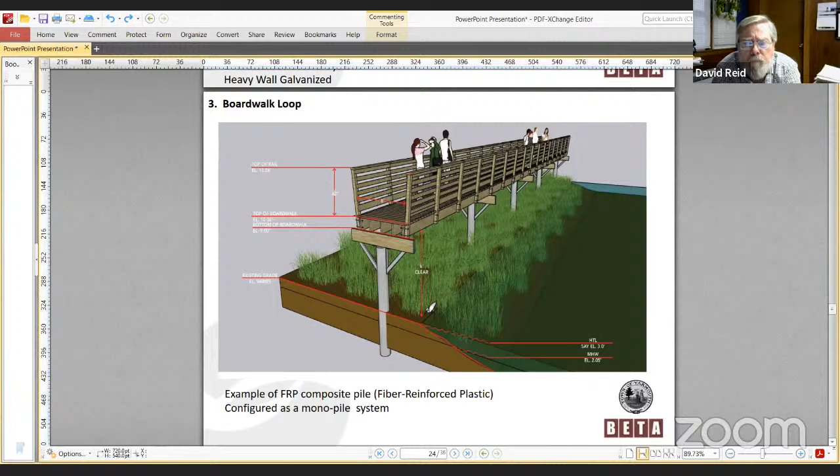Yeah, good questions. I'm not sure if I'm ready to say. We're working on this kind of matrix, this is just the beginning of it, which is going to help us all work through the decision-making process. There are different advantages and pros and cons to each of these systems, and the more we're getting into the specifics, the more we're learning about the trade-offs in terms of life expectancy, constructability, and impacts in the marsh.

To answer your question about catastrophic events, I think any of the systems might be left standing, whether it's the helical anchors or piling like this design, and you might see the superstructure be damaged in a catastrophic event with massive ice flows or debris in the water. These would remain, and you might see damage to the superstructure above. But those kinds of questions are more suited for our structural engineers, and we can have them join at the next meeting if you'd like to talk with them more about how to go through the analysis of which system is best.

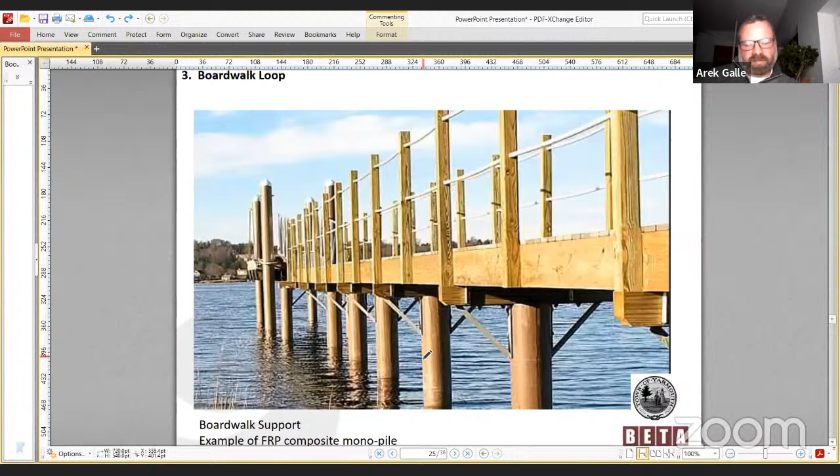These are interesting because the system has been around since the late 90s, so maybe 25 years of experience with them, and they're showing not much sign of degradation or aging. They do have a bigger footprint, but if their lifespan is significantly longer, they may last and minimize future impacts to the marsh, because there would be no need for replacement, no need for work down in here to repair them, if they are borne out to be as durable as people are thinking.

Okay, Arek, could those be set, would you use vibratory equipment or would you set it with a pile driver? Yeah, good question. We're working on that. We think it would be a rubber tracked excavator with essentially a pile driving head affixed to it, that would be on mats in this scenario out on the marsh in order to get these in.

This is fairly clean looking and appealing in that regard. Every time you have a conventional bent with the helical anchors, you're going to have the brace. If we look at that example, you've got these three contact points, you've got people walking around making these connections and so on. Every time you've got one of these, we really think we need to be going both ways. I know earlier I'd said one way was adequate, but related to the installation, they're thinking that alternating is maybe a better scenario.

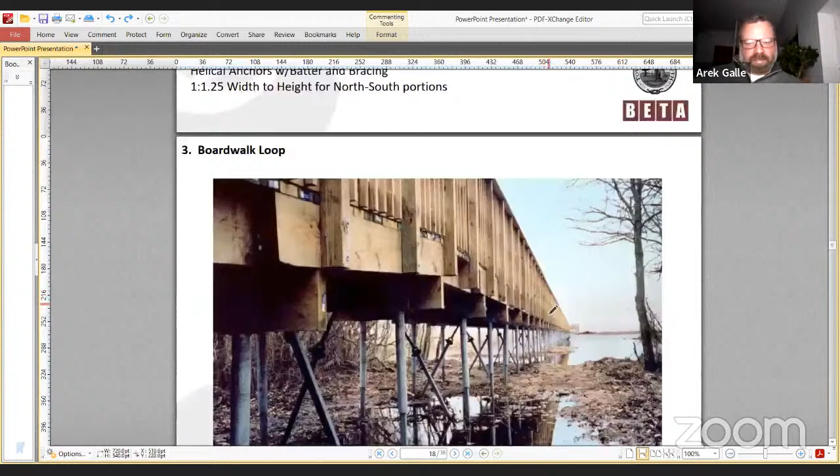So you add up all those impacts on the ground and on the marsh, or you add the impact of a single footprint, and maybe they're comparable depending on the diameter. That's something we're looking at more closely.

Arek, you'd have to draw up something showing what's visually more there, but if you need fewer piles because you can get greater span lengths between structures, that might be preferable than helical piles if you need a lot more. Once you have a better idea what the design would look like, if we could get a more accurate representation of what we could get for span lengths versus the helicals, so we can do apples to apples.

Yeah, you're right. I think there's also a very clean approach to this, which is an integral pile cap and framing with this kind of design, which would thin out this profile tremendously. You just have to look at the budget piece as well.

Now here's a curiosity - with the single pile we'd probably have less jacking issues if you had ice. What is your opinion on the helical, because you do have the batter? Could that be more of an issue?

I'll have to bring Chris Jones with me to the next meeting - he's our structural lead on this, and he could talk to you more about the pros and cons of each. I think it's just more edges here, more things to get hung up on as material and tides move through, versus maybe a simplified or more streamlined approach.

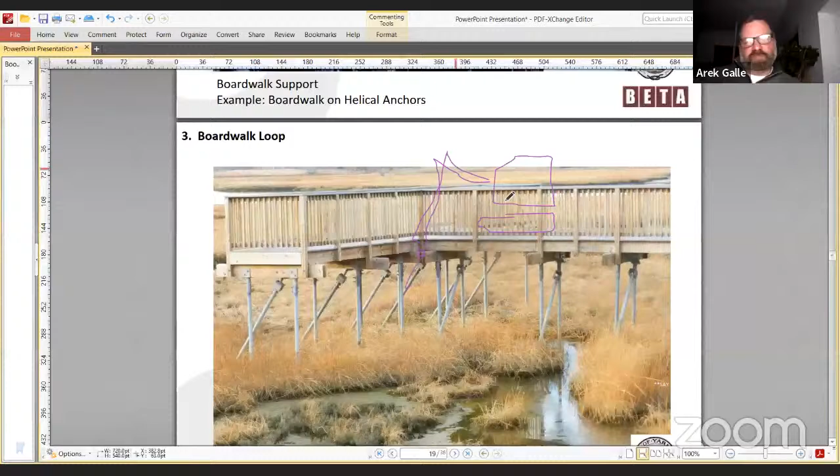One of the things we're getting more details on - our initial hope had been that this construction could be done with the equipment staged on pieces of the boardwalk that were already built. I'll try to draw this out, but the rig essentially drilling and installing these, working off of a piece that's already constructed.

Whereas you would have the crane mats for the piles. But the thing is, because we're going through the brush area, they've already been out there - it was similar equipment when we were doing the borings. So it'd be similar impacts.

You could just have requirements that they use high flotation tracks so they have low ground pressure. Is it bigger equipment though, or the same size? It's bigger equipment, but the size doesn't really impact the amount of disturbance - it's ground pressure. The bigger the track, you could have a small rubber track excavator with the equivalent ground pressure of a much larger machine. It's basically how big the track is.

Think like a snowcat or something like that. And then you also use crane mats you place down so it doesn't tear up the surrounding ground. We did a similar path down in, was it Marion? We went out to the salt marsh and installed steel pipe piles.

What we're seeing is because of the height of these above grade, in order for the equipment to be on the decking and screw the anchors in, there's a lot of torsional stress on that equipment - it wants to twist when it's drilling these in on the deck. That twisting motion, wanting to rotate as it sits up here, is causing stresses on the design of the boardwalk that have to be factored in if the plan is to drill from above.

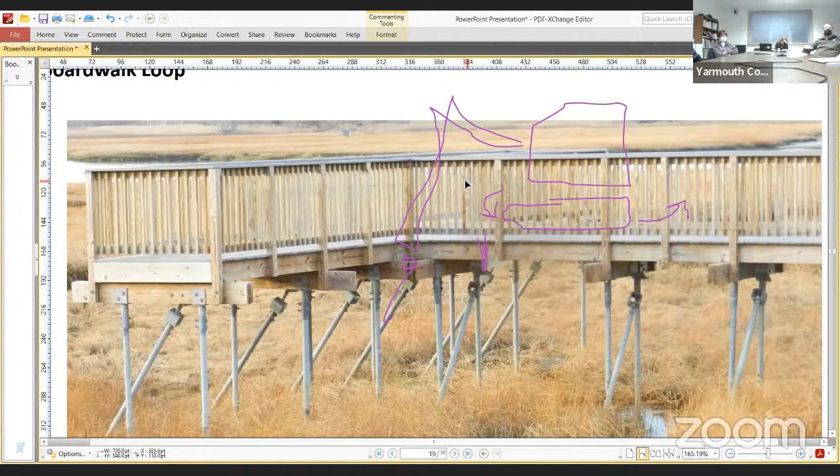Yeah, because Arek, I've seen them use what you're showing here. When you go above like 30 inches or so, for low profile decks it's great. But when you get something higher than this, you have to over-design the structure to handle the installation. So at the heights we're at, this is getting more involved.

And so in all likelihood, even with a micropile in this application, the equipment would be on the marsh. So to your point about low ground pressure, high flotation mats, that's probably the way any of the systems are going to be approached, just because of the transfer of costs into the boardwalk structure at these heights. And most of that's considered a temporary impact anyway.

Okay, where are we? We touched on the questions about galvanizing and some of the systems we're continuing to look at, and the beginnings of this matrix. We're going to continue refining this to help guide the decision-making process.

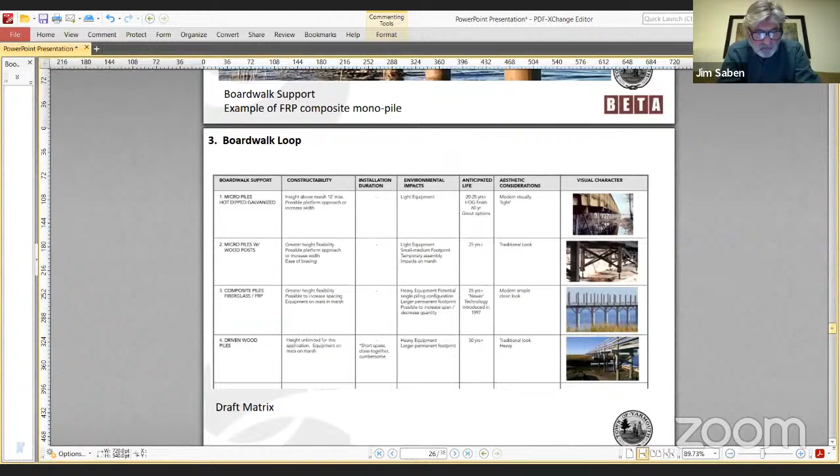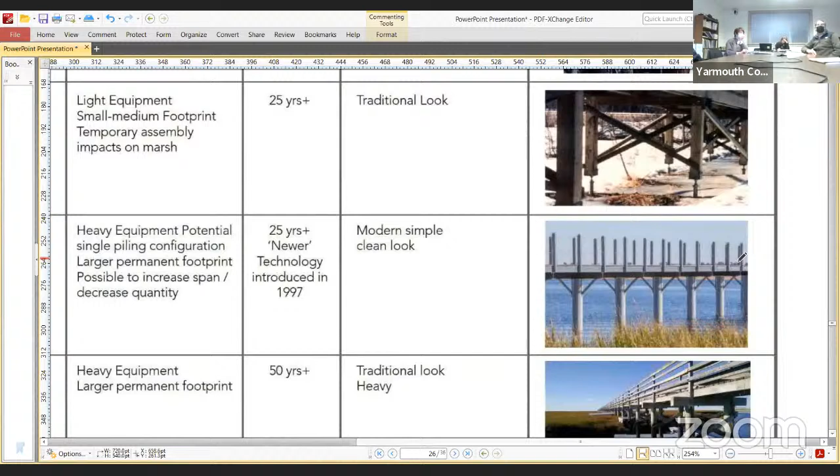And Kelly, you were saying the commission prefers the composite pilings. Aesthetically, it looks better too. And if we could get much greater spacing with that, Eric - yeah, I agree.

I think they also touched on leachates from the materials - pressure treated timbers or some other treatment leach down into the marsh over time, maybe to some degree with the galvanizing zinc treatment as well. I don't think there's a lot of leachate from an FRP product.

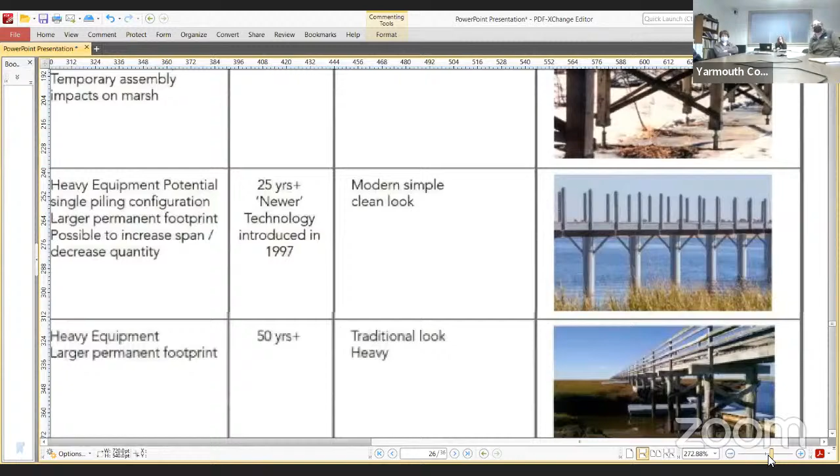So again, probably another column for this matrix as we work - I think it'd be zero basically. Yeah, it's a nice system, and I think it's one we're looking into in greater detail, especially the aesthetic benefits coupled with longevity, not having to go back on the marsh.

Right, and I think potentially from a resiliency standpoint it might be a more resilient system too - all the points you're making about flood and ice. Yes, absolutely.

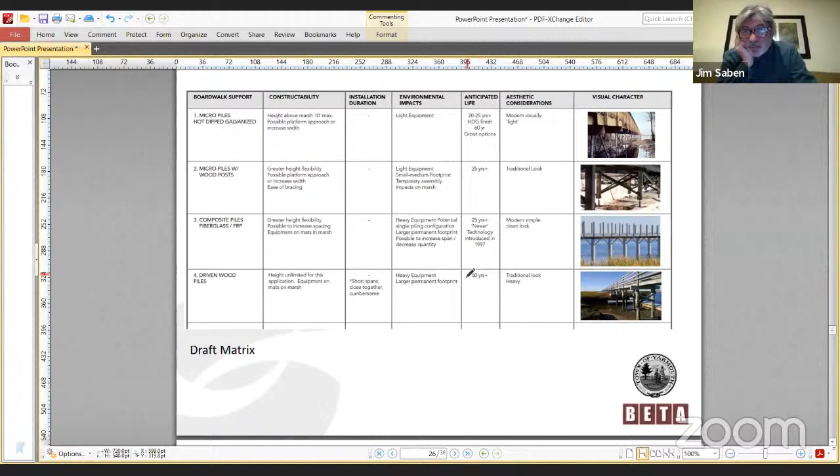No, that was the only reason I mentioned it - if we needed a vote on the minutes and you needed me, I didn't want to desert you. I don't think I have minutes. Do I have minutes? So Eric, would you give us a moment to jump out of our presentation? Yeah, absolutely. Oh Eric, you could stick around - I'm not going anywhere. I just thought I'd let you look at each other and go through it. I don't want to look at them. They don't want to look at me either.

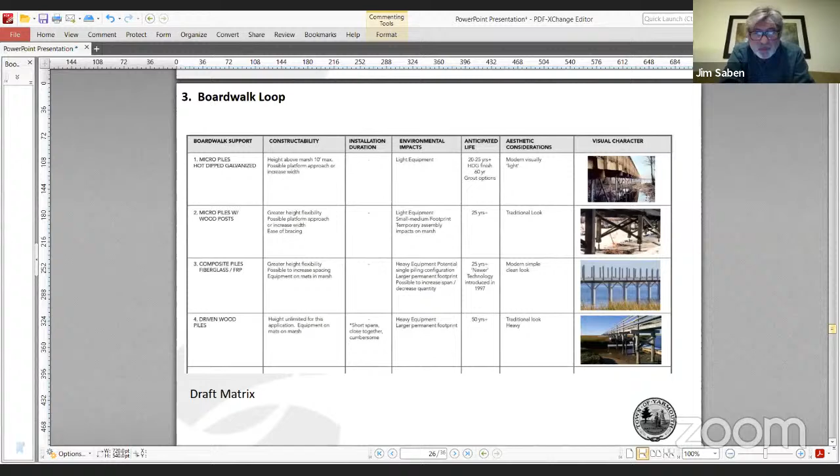They're trying to make sure they kind of emulate the existing one as best they can. Right, because that one with the cross members, when you have storm events, you get logs and other stuff going through there. I think that'd be very susceptible to damage, and from a maintenance standpoint, I don't think it'd be beneficial in the long run with the heavier timber. It looks more traditional, but I think it's gonna be a maintenance nightmare in the long run.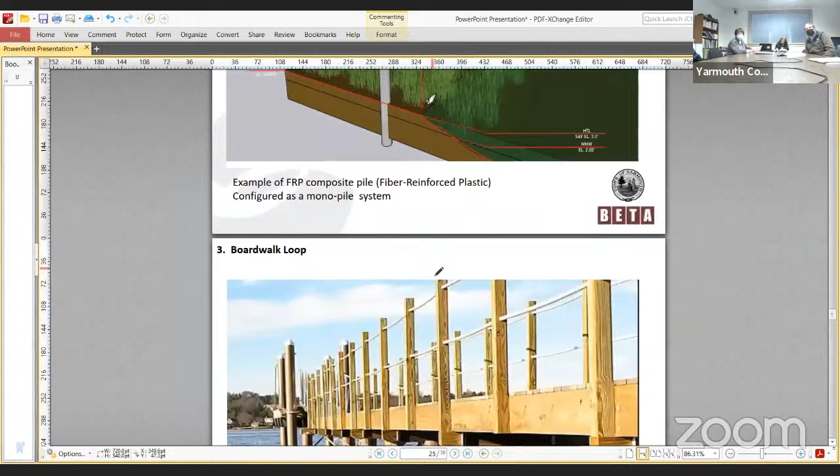I kind of like the look of that monopile one, if that works. Agreed, especially the one where the pier is set into the structure, with the integral cap. Very, very clean looking, and aesthetic.

It would definitely let a lot of light in too, probably, if we had fewer of them.

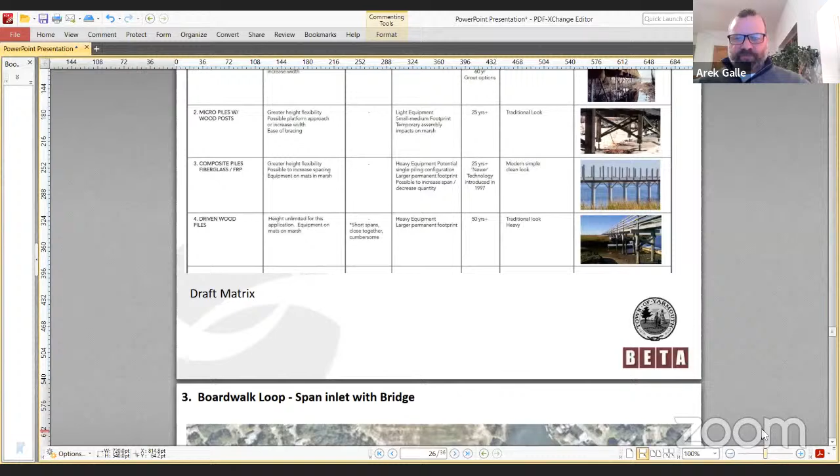What's the diameter of those? Yeah, they look substantial, 12 inches. We're looking, I think, at least 12 probably. They're gonna be a little bit different than a wood pile that's gonna vary, they're gonna be all the same.

Not to get too off track of constructability, but just to reference, technically it can be fairly challenging to make all of these points align in the field without some sort of adapter plate, welding, or field fabrication. While you want these to be all kind of uniform and level, there'll be some field work that means modification and galvanizing in the field, and that finish is never quite as perfect as when it comes from a factory. So whether that adjustment is down at the mud line or up at the top, there is a process, because not all of these drive in perfectly at 10 degrees on either side and 45 on the brace. So there's an alignment or reconciliation that has to happen.

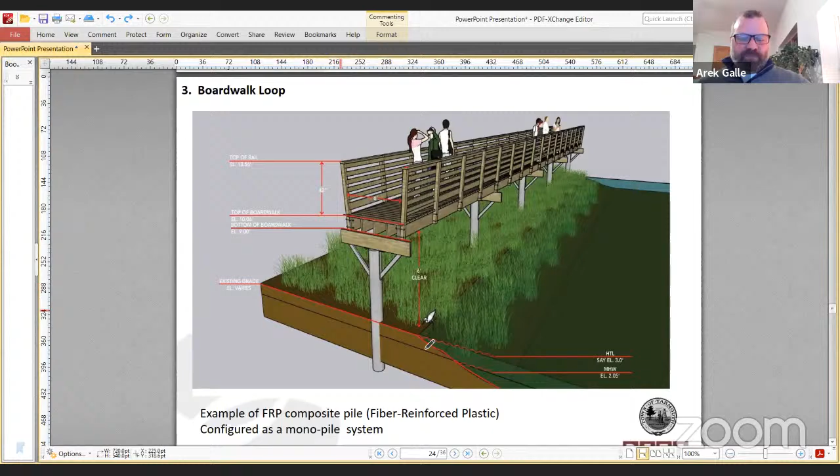The simpler system has less need for that. I think the monopile, you might realize, is very straightforward - less people walking around in the marsh, less custom field finishing in the marsh. Just other layers to this that we're still looking at that make it appealing.

The other thing with the helical is it's not showing, but you're gonna need inline bracing that goes longitudinal with the structure too. I don't know if we felt that was continuous. On the helical piles, in order to stabilize it, you're probably gonna need diagonals that go down longitude or in line with the structure. That should be drawn on. I don't think it's everyone, but yes, there does need to be that stiffening, so there's gonna be more there.

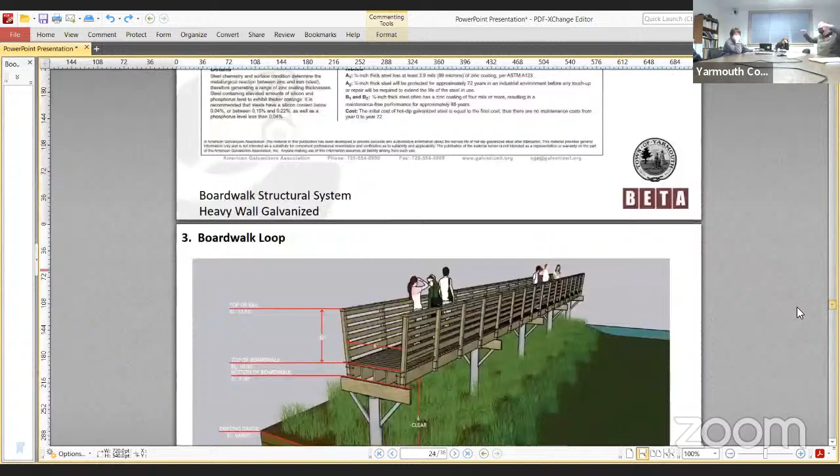It starts getting cluttered, looks like an erector set. It's a very good system when it's low, but when you start getting higher and higher, it gets busy. No, those are all good points.

So this boardwalk system - the approach was going to translate into having to deal with crossing as the boardwalk comes back around. We mentioned this in the agency review, we'd like to span this inlet entirely, so it ends up being like a small bridge. There's different loading on the support system and the piles for that, and ideally we can make all of these the same system.

A little bit heavier pile would work better for a bridge. So how big are we talking? Because if we actually end up doing the pile, we have a larger span, maybe that issue goes away. Well, that's one of the advantages - if you pick a system like that, everything could be the same, without elaborate doubling or bracing.

Potentially the larger diameter pile, maybe a 40 or 45-foot span is what we're looking at here. We want to go from the high side on either side, and stay out of this area below the high tide line, just barely above it on either side of the inlet.

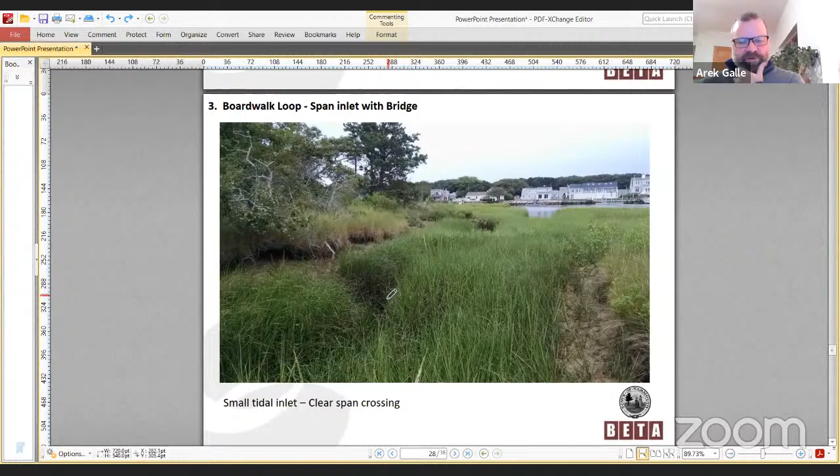Somebody had asked me about a metal bridge or a wood bridge. I mean, those would be options, but I think getting it there becomes complicated. A metal bridge would have corrosion issues, and wood would be very heavy structurally. It's too far in to get a barge to this location, so we'd be dealing with terrestrial equipment, and how do you get that kind of structure out there to swing it into place?

If you can use the same type of techniques, Arek, I'd suggest looking at, for longer spans, glulams - glue laminated lumber. You get longer spans out of it, or if needed, some galvanized structural steel elements through there. On the interior you can face them with wood, so you have that aesthetic, but get a longer span out of it.

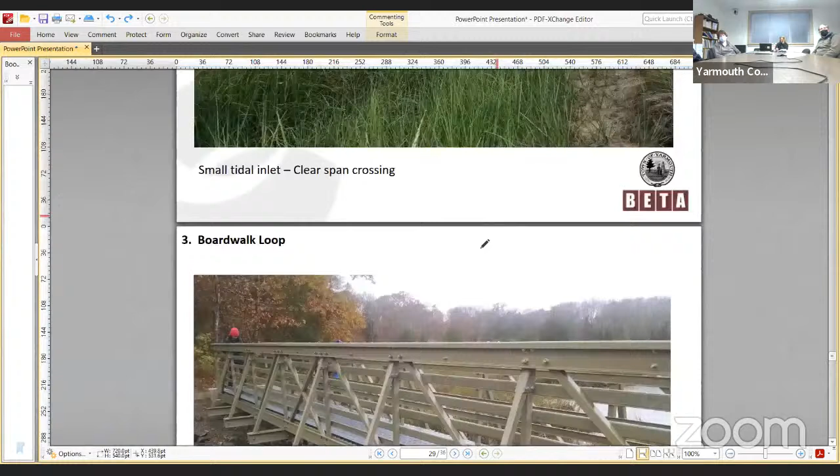In terms of how deep they are, but getting it there when you're talking about that length, you're just looking at the impacts, right? But you could laminate it - like a flitch plate or something, using some kind of structural element in there, like a C channel, bolted in. There's different techniques. So what Rich is talking about is a piece of steel in between the pieces of lumber that are glued together. The steel makes it stronger and can span greater distances.

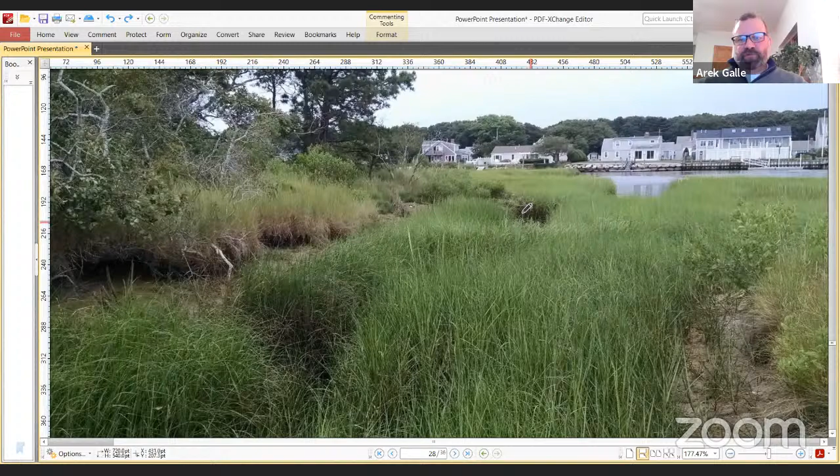I think if you're getting to that kind of system, you need a crane, a larger piece of equipment out here, and it's hard to get a fully assembled 45-foot bridge to the site. No, what I'm saying is you could assemble it as long as we had the beams - you launch it from the shore. You set up some A-frames and basically push it out from the shore onto those pile support structures, coming across from this side and pushing it over. The beams become your stringers, and then you just do the decking like they're going to build for the rest of the boardwalk, with carpenters out there assembling it in field.

So at least it'll look fairly uniform, in wood, correct. So we've looked at this area, we've all walked this and stood here at different times of the tide, and we're just beginning to look at the framing system, support system for the boardwalk, and what options we might have for bridges. Like I said, this was a built-up one on site. We'll look at some of those other options, like a wood version, and see what that might look like.

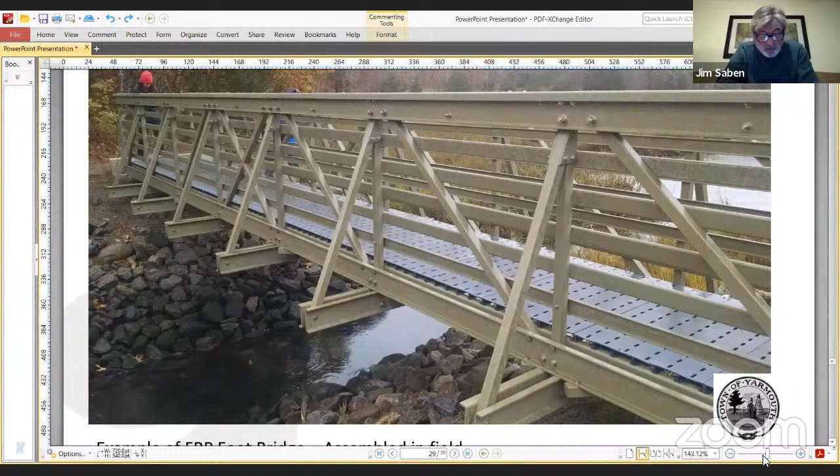All right, good. And I see you've got some information about the kayak - you just give us some different looking launch options, as far as that's what these pictures are.

Correct. Kathy, remind me, when did Carl jump on our call? Was that with the police? I think he joined us. No, he was at our last meeting, here. Was it at the last meeting? Okay, so at that meeting he said this is okay, but he said he's seen some other ones that are a little nicer and a little more user friendly. I don't know if we had much input - this was kind of a carryover from the first designs. This is the site he directed us to, which is just a little more modular and flexible.

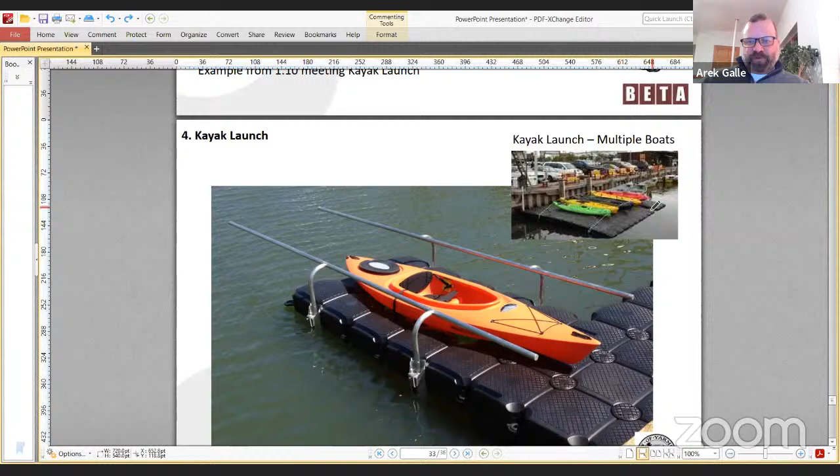I really like this kind of tapered one where there's lots of ways to launch off of it, rather than something with this hard edge and decking and kind of one launching point. He was recommending something along these lines. You know what's nice about that one at the top corner is multiple people could use it at the same time, so you're not waiting for somebody.

As we get into this design a little bit more, if there was a rental here, could they stage a couple of kayaks on the float itself, so they're able to get them in without passage over the ramp and so on? This was his recommendation, and I think they're nice. We're going to follow up with these folks.

Kelly, does the width of the float matter? Would the Concom have an issue? Well, we have a square footage requirement, maximum of 200 square feet, so I'm assuming you're not proposing to go beyond that. For communal docks, they do allow higher numbers. There's not really, I think they try to limit it to 300 square feet for a residential communal type structure, but obviously if this is a larger public project.

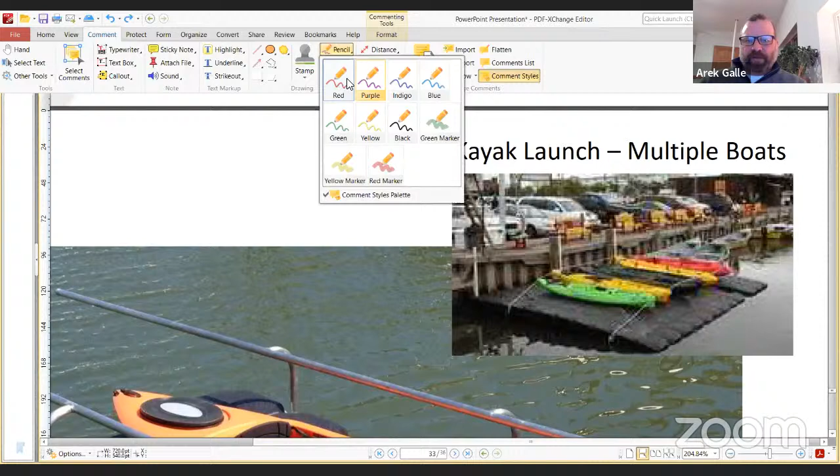So you think they would allow something like the upper right? I think part of it is kind of hard with the setting, like how are you accessing it? Would that be at the end of a pier? Yeah, I think that's a good question. I think there'd be a gangway down from the pier to it from a higher elevation. So Arek, would there be a trail that came out to it and you'd have the dock, or would we almost have to do a boardwalk structure with piles that went out and then a ramp coming down to it? Yeah, I think that's right.

We'll continue to look at this a little bit more. We need to do some more field work to get some bathymetry. They were careful to talk about the clearances, and I know the town has more restrictive requirements in terms of low tide clearances when the float is there, the distance to the mud line. So we need more data, and we'll be out in the field to get that.

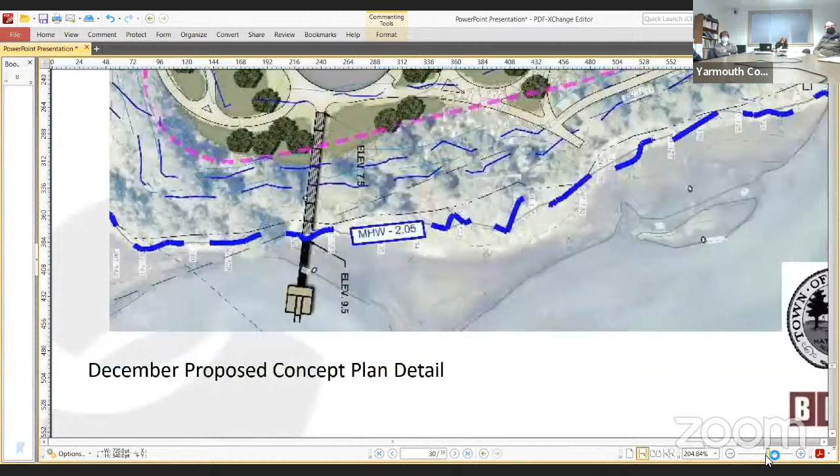I can imagine with the town that a lot of that is because of the use with boats. If this is really going to be for kayak use, then they may go more towards 2.5 feet rather than 3 feet of water depth. Good point. Because it's not most boats, yeah, and looking at the property.

What else we got? I think that brings us to the end, which was, we're taking a little more time as we're going through the schedule. We're now at the end of January, and we were really looking to have a set produced at like a 30% level somewhere in the middle of January. So this is all moving out into February at this point, as far as wrapping up a 30% package with construction costs and making some of the decisions on structures.

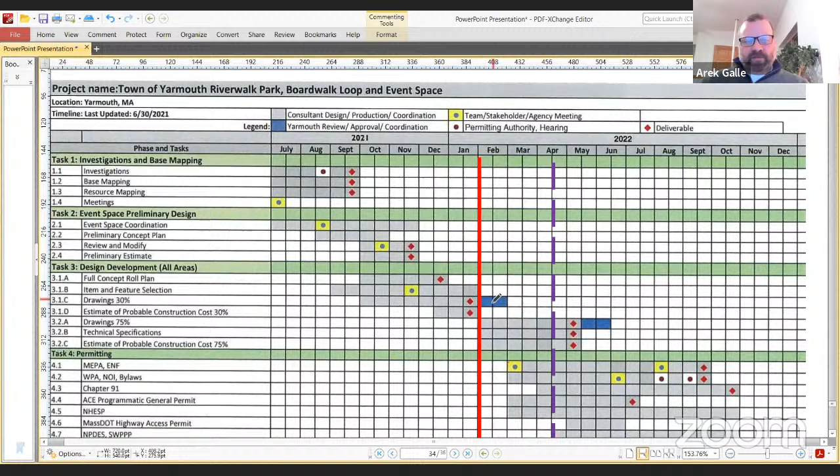You've helped us a lot tonight with the restroom discussion, the driveway discussion, so that's all good. Big picture, what we're looking at is trying to move towards permitting, initiating that process in April. So we really don't want to let this go much longer than into the month of February, to try to finish this up so we can move forward with the permitting efforts.

A lot of this is related to what Kathy mentioned about some of the code changes at the end of the year, and trying to make sure we've got these permits filed with some time there. Anybody got any questions regarding the timeline? We're getting there. We're making progress, for sure.

Okay, is that the presentation by Arek? And where'd everybody go? Yes, that's what I have for tonight. How'd I disappear? We can see you, Jim. I can't see anybody. You're not really there. We can see you, so be careful.

All right, Arek, do you have anything else, or are you all set? I don't have anything else for tonight. I think, in an ideal world, we should look out another two weeks and be back to you, if you're able to do that timeline, with more discussion on the pilings so we can move through that, and the bridge, and move through that process. Okay, it's two weeks from tonight, Arek.